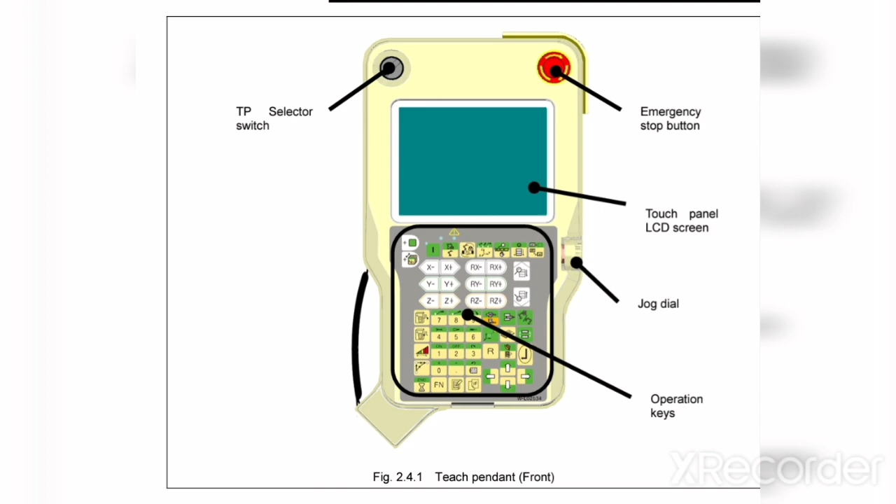Point: operation box is connected. The circuit breaker is provided on the front side of the FD11 controller, and the teach pendant and operation box are connected here as well. Circuit breaker: this turns the power of the controller on and off. Teach pendant: the teach pendant has the keys and buttons to perform teaching, file operation, various condition settings, etc.

Operation box: buttons for performing the minimum required operations such as motor power on, automatic operation start and stop, emergency stop, and switching between the teach and playback modes are provided. Fig. 2.1.1 FD11 controller operation box specifications. Circuit breaker, teach pendant, operation box. 2.1 Controller, 2-2.

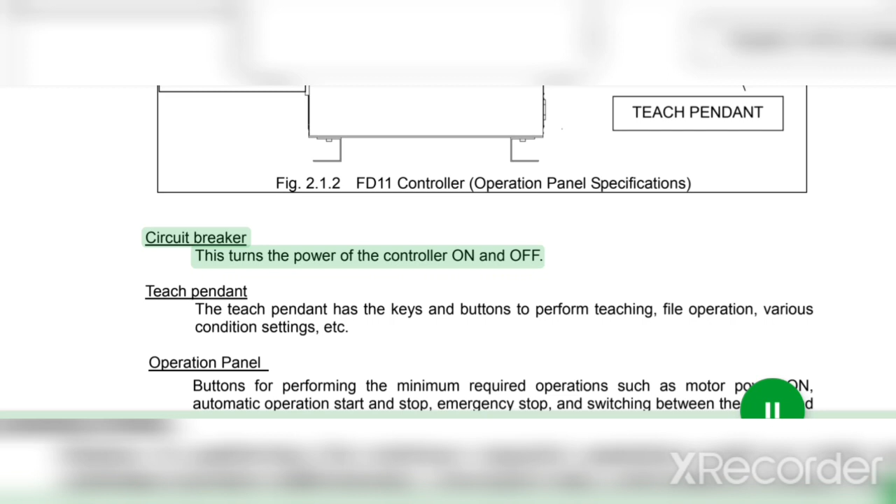2.1.2 When there is an operation panel, the circuit breaker and operation panel are provided on the front side of the FD11 controller, and the teach pendant is connected here as well. Fig. 2.1.2 FD11 controller operation panel specifications. Circuit breaker: this turns the power of the controller on and off. Teach pendant: the teach pendant has the keys and buttons to perform teaching, file operation, various condition settings, etc.

Operation panel: buttons for performing the minimum required operations such as motor power on, automatic operation start and stop, emergency stop, and switching between the teach and playback modes are provided. Operation panel, circuit breaker, teach pendant. 2.2 Operation box, 2-3.

2.2 Operation box. The operation box is provided with the minimum buttons required to exercise basic control over the robot, such as motor power on, starting and stopping automatic operation, emergency stop, and switching between modes. Table 2.2.1 Functions of buttons and switches on the operation box. Motor on button: this is used to set the motor power to on. When it is set to on, the robot is readied for operation.

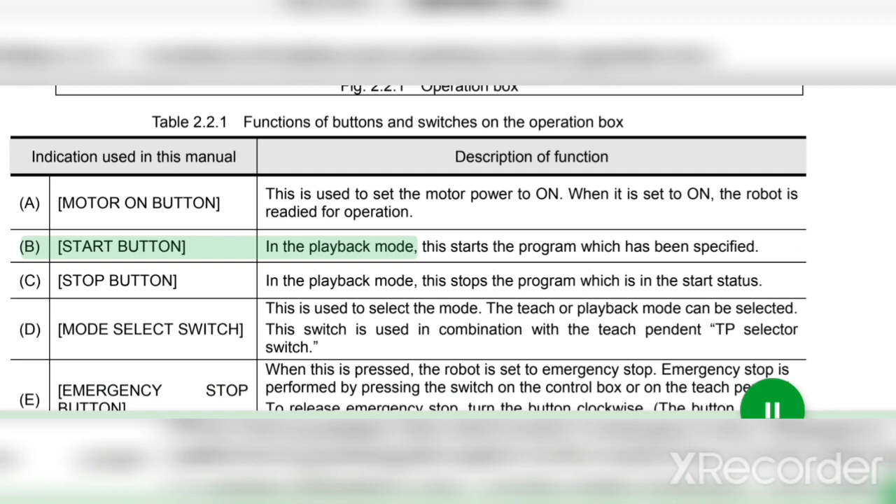Start button: in the playback mode, this starts the program which has been specified. Stop button: in the playback mode, this stops the program which is in the start status. Mode select switch: this is used to select the mode. The teach or playback mode can be selected. This switch is used in combination with the teach pendant TP selector switch.

Emergency stop button: when this is pressed, the robot is set to emergency stop. Emergency stop is performed by pressing the switch on the control box or on the teach pendant. To release emergency stop, turn the button clockwise. The button will then return to its original position. Point: when a control box is connected, an operation panel cannot be installed.

Emergency stop. Motor on. Start. Stop. Teach, playback. Fig. 2.2.1 Operation box. 2.3 Operation panel, 2-4.

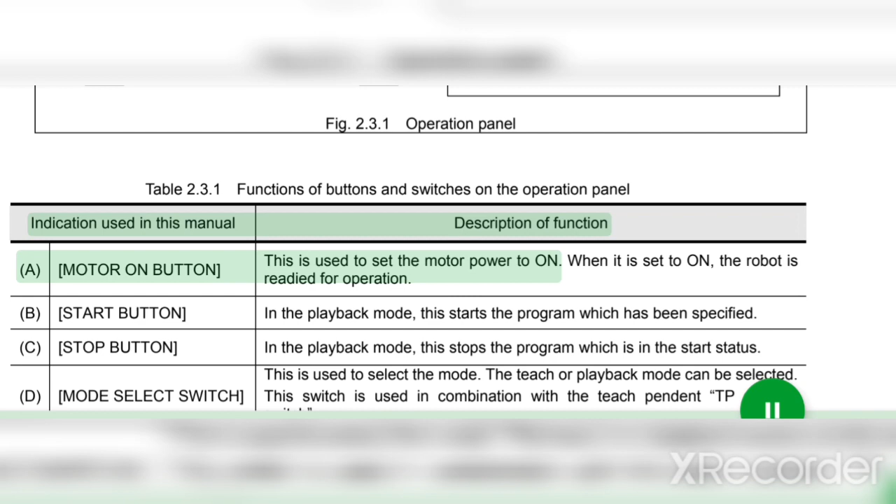2.3 Operation panel. The operation panel is provided with the minimum buttons required to exercise basic control over the robot, such as motor power on, switching between the modes, starting and stopping automatic operation, and emergency stop. Table 2.3.1 Functions of buttons and switches on the operation panel. Motor on button: this is used to set the motor power to on. When it is set to on, the robot is readied for operation.

Start button: in the playback mode, this starts the program which has been specified. Stop button: in the playback mode, this stops the program which is in the start status. Mode select switch: this is used to select the mode. The teach or playback mode can be selected. This switch is used in combination with the teach pendant TP selector switch.

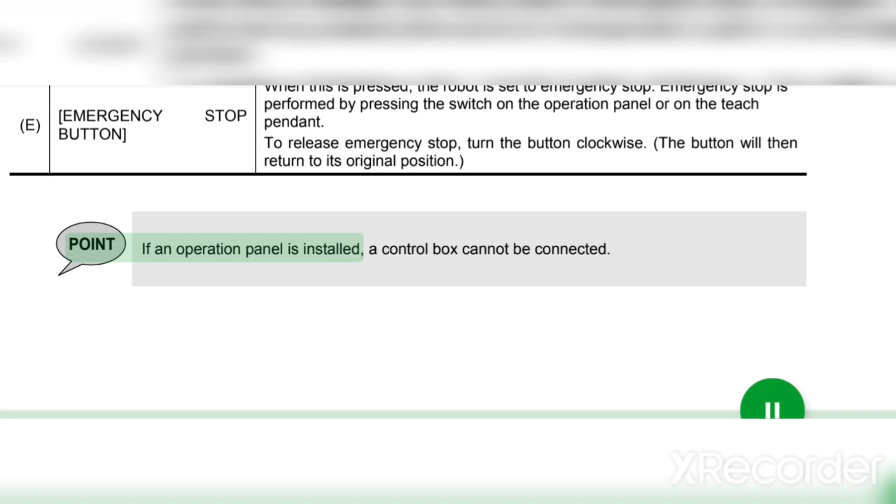Emergency stop button: when this is pressed, the robot is set to emergency stop. Emergency stop is performed by pressing the switch on the operation panel or on the teach pendant. To release emergency stop, turn the button clockwise. The button will then return to its original position. Point: if an operation panel is installed, a control box cannot be connected. Fig. 2.3.1 Operation panel. 2.4 Teach pendant, 2-5.

2.4.1 External appearance of teach pendant. The teach pendant is provided with operation keys, buttons, switches and jog dials, etc. for creating programs and performing various settings. You can allocate move commands to number keys 7-9 by pressing the enable key at the same time as a number key 7-9, and allocate often used function commands (function groups) by pressing the enable key and a number key 4-6. Functions can also be allocated to the jog dial.

Caution: be sure to follow the cautions below for the USB port. See Fig. 2.4.2. Only connect USB memory while operating files. When file operations have finished, always remove the USB memory and close the USB cap. Continuing use with the USB memory connected, or failing to close the USB cap, may hinder the dust protection, waterproofing, and anti-spatter properties, which may lead to failure.

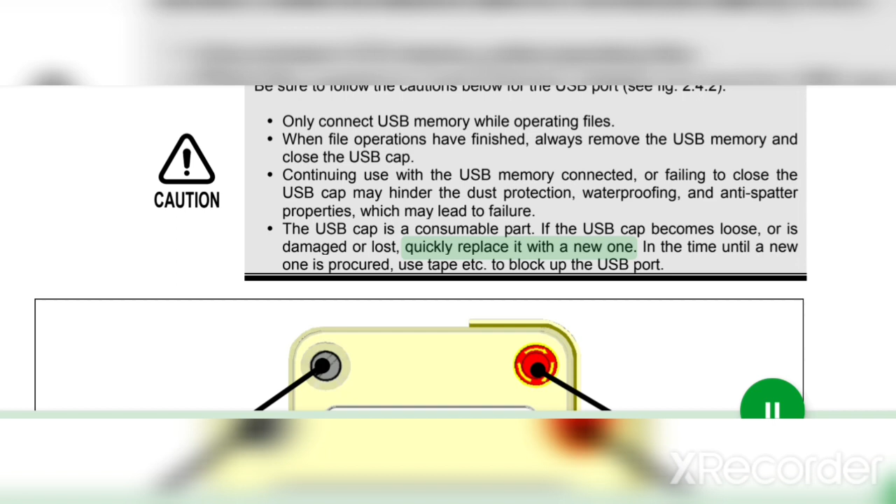The USB cap is a consumable part. If the USB cap becomes loose, or is damaged or lost, quickly replace it with a new one. In the time until a new one is procured, use tape etc. to block up the USB port.

Fig. 2.4.1 Teach pendant front. Info: The design of the operation keys shown in Fig. 2.4.1 may be slightly different to those on the actual Teach pendant. Operation keys. Jog dial. Touch panel LCD screen. Emergency stop button. TP selector switch. 2.4 Teach pendant, 2 to 6. Fig. 2.4.2 Teach pendant rear.

2.4.2 LED functions. LEDs are arranged above each Teach pendant operation key, and operate as shown below. Fig. 2.4.3 Teach pendant LED. Table 2.4.1 LED functions. LED color, functions. Green: flashes during preparation of motor power on, and lights when motor power is on (servo on). It is the same as the green motor power on button lamp on the operation panel and control box.

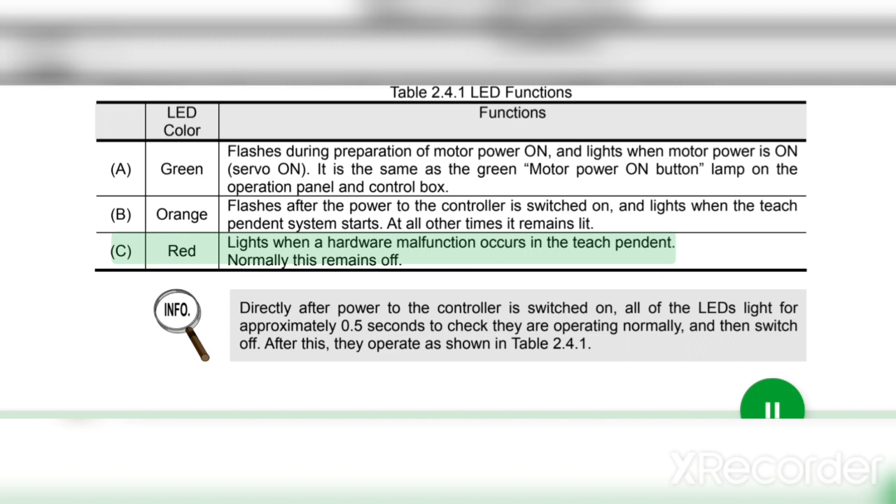Orange: flashes after the power to the controller is switched on, and lights when the Teach pendant system starts. At all other times it remains lit. Red: lights when a hardware malfunction occurs in the Teach pendant. Normally this remains off. Info: Directly after power to the controller is switched on, all of the LEDs light for approximately 0.5 seconds to check they are operating normally, and then switch off. After this, they operate as shown in Table 2.4.1.

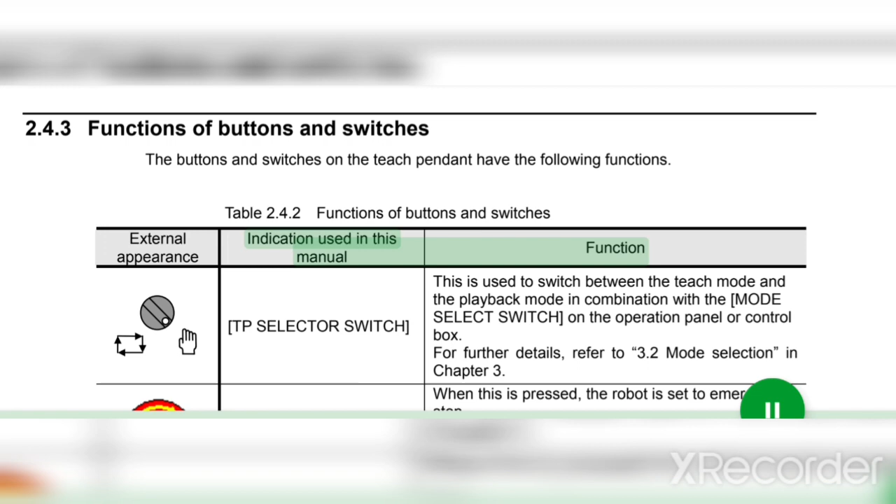USB port. Enable switch. USB cap. A, B, C. 2.4 Teach pendant, 2 to 7. 2.4.3 Functions of buttons and switches. The buttons and switches on the Teach pendant have the following functions. Table 2.4.2 Functions of buttons and switches. External appearance, indication used in this manual, function. TP selector switch: this is used to switch between the Teach mode and the playback mode in combination with the mode select switch on the operation panel or control box. For further details, refer to 3.2 Mode selection in Chapter 3.

Emergency stop button: when this is pressed, the robot is set to emergency stop. To release emergency stop, turn the button in the direction of the arrow. The button will then return to its original position. Enable switch: used to manually operate the robot in Teach mode. Normally, it is provided on the left side only. There may be two buttons, one at the left and the other at the right as an option.

When the enable switch is grasped, power is supplied to the robot (motor power on, servo on). The robot can be operated manually only while the switch is grasped. If an impending danger is sensed, either release the enable switch or grasp it tightly until a clicking sound is heard. The robot is set to emergency stop. For details on how to operate the enable switch, refer to 3.3 Turning the motor power on in Chapter 3.

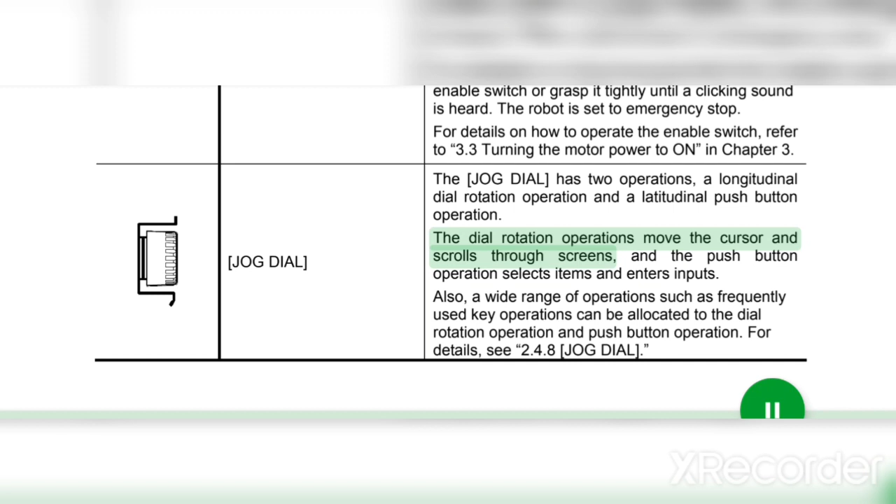Jog dial: the jog dial has two operations, a longitudinal dial rotation operation and a latitudinal push button operation. The dial rotation operations move the cursor and scroll through screens, and the push button operation selects items and enters inputs. Also, a wide range of operations, such as frequently used key operations, can be allocated to the dial rotation operation and push button operation. For details, see 2.4.8 Jog dial. 2.4 Teach pendant, 2 to 8.

2.4.4 Functions of operation keys. The operation keys provided on the Teach pendant have the following functions. Table 2.4.3 Functions of operation keys. External appearance, indication used in this manual, function. Enable: the functions are executed by pressing this key together with other keys. Also, various functions can be executed by rotating or pushing the jog dial while holding down this key.

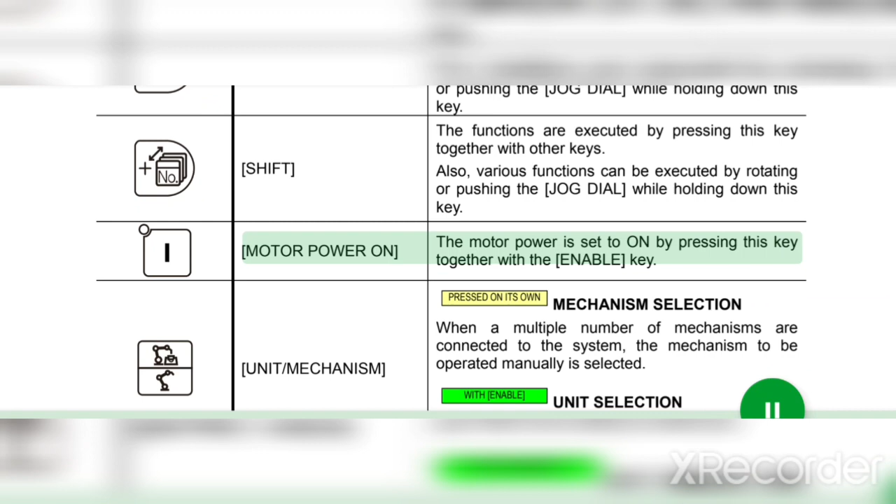Shift: the functions are executed by pressing this key together with other keys. Also, various functions can be executed by rotating or pushing the jog dial while holding down this key. Motor power on: the motor power is set to on by pressing this key together with the enable key. Mechanism selection: when a multiple number of mechanisms are connected to the system, the mechanism to be operated manually is selected.

Unit/mechanism. Unit selection: when a multiple number of units are defined in the system, the unit to be operated is selected. This key is used by a system in which a multiple number of mechanisms are connected, and it has the following functions. Synchro motion on/off: it selects or releases synchronized cooperative manual operation. Synchronize. Synchro motion on/off.

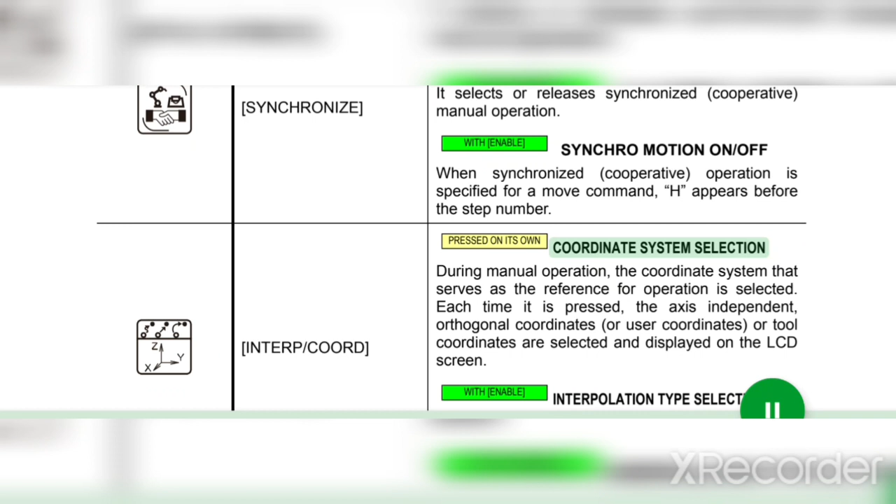When synchronized cooperative operation is specified for a move command, H appears before the step number. Coordinate system selection. During manual operation, the coordinate system that serves as the reference for operation is selected each time it is pressed. The axis-independent, orthogonal coordinates, user coordinates or tool coordinates are selected and displayed on the LCD screen. Interp/coord.

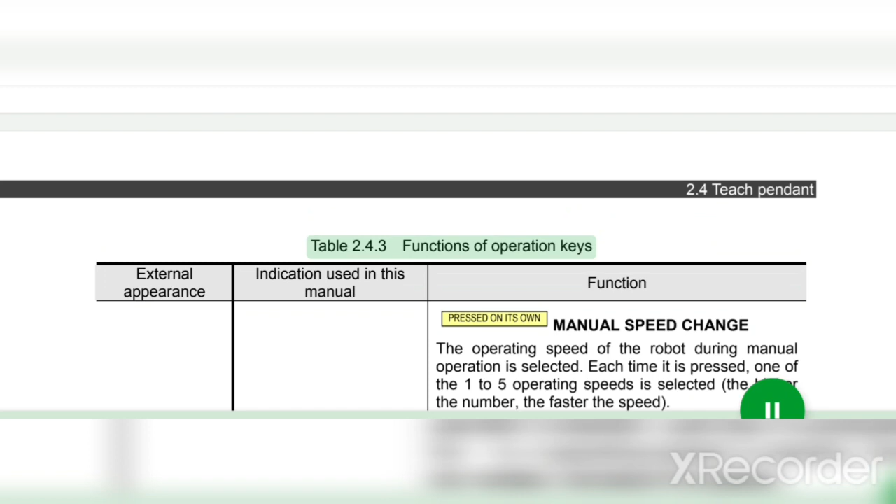Interpolation type selection. This switches the interpolation type (joint interpolation, linear interpolation or circular interpolation) of the recording status, with enable, pressed on its own. 2.4 Teach pendant, 2-9. Table 2.4.3 Functions of operation keys. External appearance. Indication used in this manual. Function.

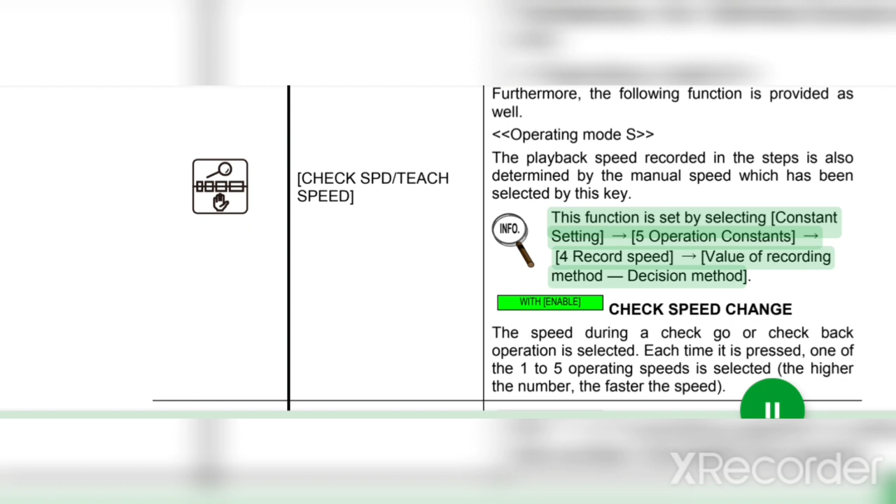Manual speed change. The operating speed of the robot during manual operation is selected each time it is pressed. One of the 1 to 5 operating speeds is selected. The higher the number, the faster the speed. Furthermore, the following function is provided as well. Operating mode S. The playback speed recorded in the steps is also determined by the manual speed which has been selected by this key. Info. This function is set by selecting constant setting, 5 operation constants, 4 Record speed value of recording method decision method. Check SPD/teach speed.

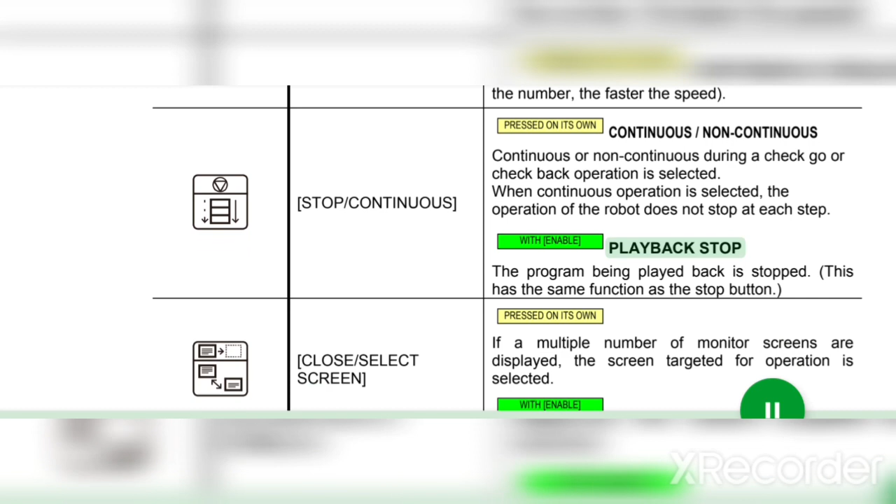Check speed change. The speed during a check go or check back operation is selected each time it is pressed. One of the 1 to 5 operating speeds is selected. The higher the number, the faster the speed. Continuous/non-continuous. Continuous or non-continuous during a check go or check back operation is selected. When continuous operation is selected, the operation of the robot does not stop at each step. Stop/continuous. Playback stop. The program being played back is stopped. This has the same function as the stop button.

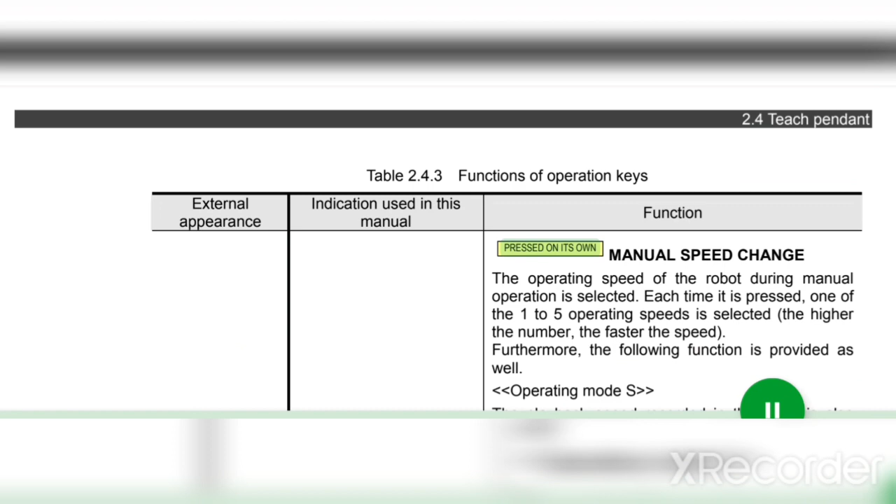If a multiple number of monitor screens are displayed, the screen targeted for operation is selected. Close/select screen. The selected monitor screen is closed. No function. Axis operating keys. Axis operation. The robot is moved manually. If an auxiliary axis is to be moved, the operation target is selected ahead of time using unit/mechanism, with enable switch, pressed on its own. 2.4 Teach pendant, 2-10. Table 2.4.3 Functions of operation keys. External appearance. Indication used in this manual. Function.

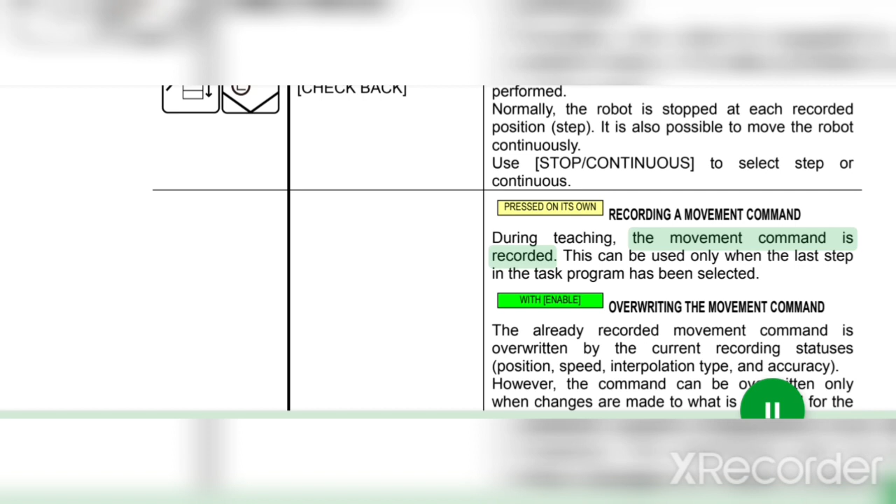No function. Check go/check back. When these are pressed together with the enable switch, the check go or check back operation is performed. Normally, the robot is stopped at each recorded position step. It is also possible to move the robot continuously. Use stop/continuous to select step or continuous. Recording a movement command. During teaching, the movement command is recorded. This can be used only when the last step in the task program has been selected.

Write/rec. Overwriting the movement command. The already recorded movement command is overwritten by the current recording status's position, speed, interpolation type, and accuracy. However, the command can be overwritten only when changes are made to what is recorded for the movement commands. A movement command cannot be overwritten by a function command. Neither can a function command be overwritten by another function command. Operating mode: the recording position of a recorded movement command can be revised using mod position.

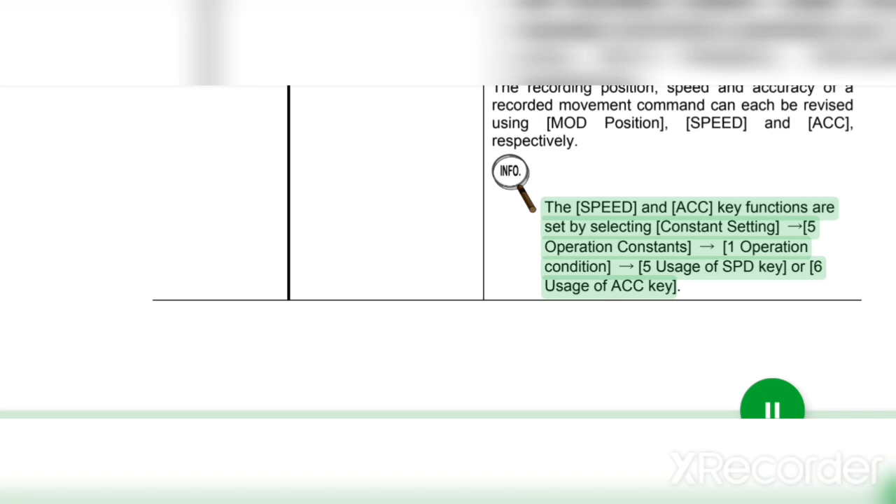Operating mode S. The recording position, speed and accuracy of a recorded movement command can each be revised using mod position, speed and acc, respectively. Info. The speed and acc key functions are set by selecting constant setting, 5 operation constants, 1 operation condition, 5 usage of SPD key or 6 usage of acc key, with enable switch, pressed on its own. 2.4 Teach pendant, 2-11. Table 2.4.3 Functions of operation keys. External appearance. Indication used in this manual. Function.

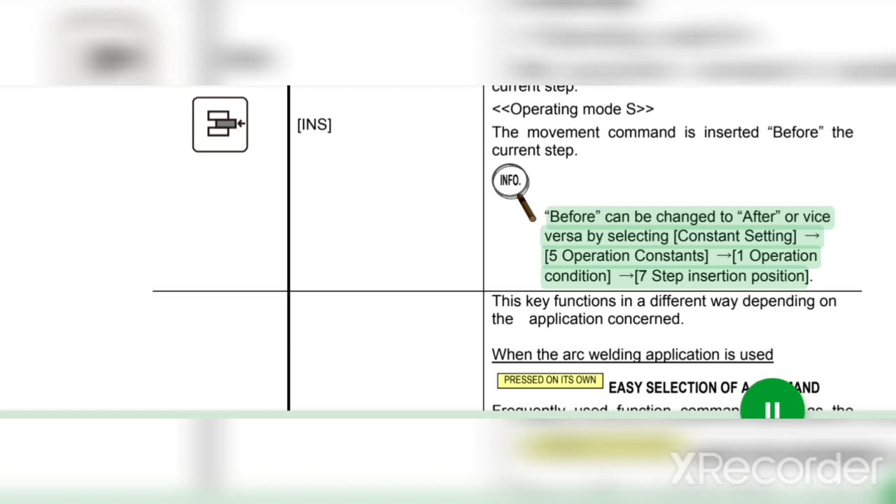No function. Insertion of a movement command. Operating mode: the movement command is inserted after the current step. Operating mode S. The movement command is inserted before the current step. Info. Before can be changed to after or vice versa by selecting constant setting, 5 operation constants, 1 operation condition, 7 step insertion position. This key functions in a different way depending on the application concerned. When the arc welding application is used, easy selection of a command. Frequently used function commands such as the movement command, welding start and stop commands and weaving commands are displayed in the F key, and can be input.

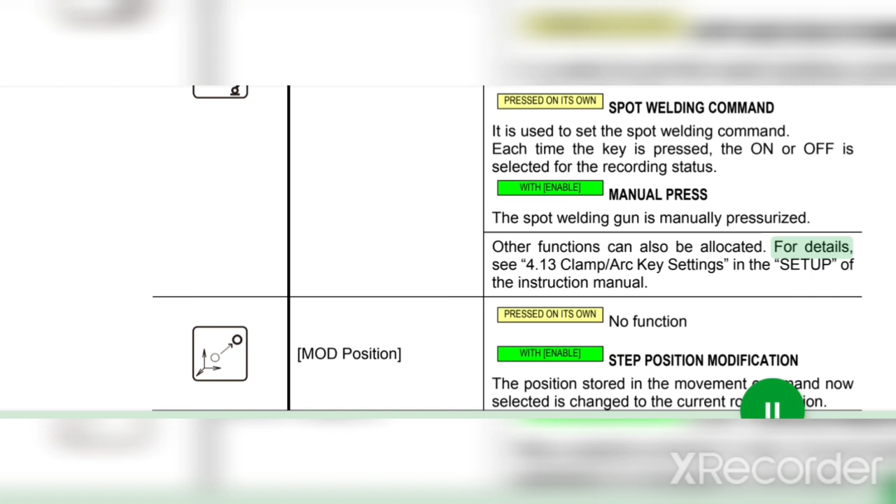No function. When the spot welding application is used, spot welding command: it is used to set the spot welding command. Each time the key is pressed, on or off is selected for the recording status. Manual press. The spot welding gun is manually pressurized. Clamp/arc. Other functions can also be allocated. For details, see 4.13 clamp/arc key settings in the setup instruction manual.

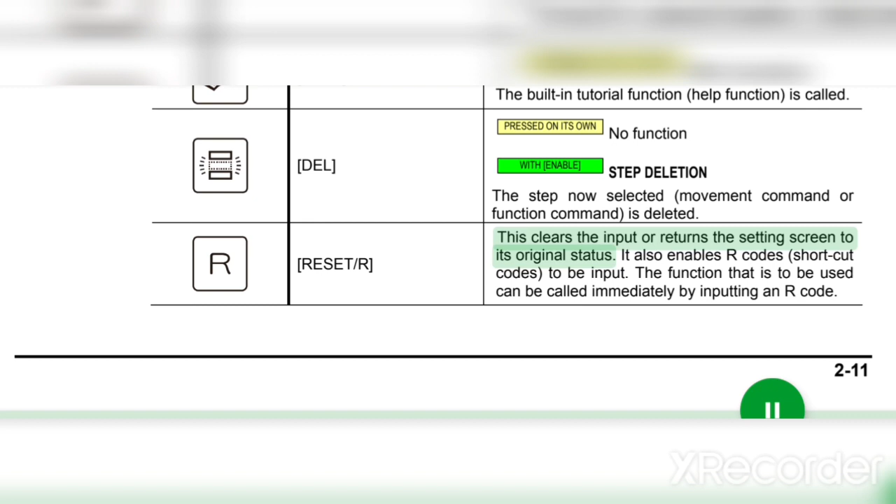No function. Mod position, step position modification. The position stored in the movement command now selected is changed to the current robot position. Help. Press this for help concerning an operation or function. The built-in tutorial help function is called. No function. Del, step deletion. The step now selected, movement command or function command, is deleted. Reset/R. This clears the input or returns the setting screen to its original status. It also enables R codes, shortcut codes, to be input.

The function that is to be used can be called immediately by inputting an R code with enable pressed on its own.

2.4 Teach pendant 2-12. Table 2.4.3 Functions of operation keys. External appearance. Indication used in this manual function. Step selection. This is used to call a step specified in the program. Prog/step. Program selection. The specified program is called. Enter. This enters the menu or numerical input contents.

Info. Determination operation of numerical input can also be performed with arrow keys by constant setting 7F-key 7, numerical input and switching to cursor under decision method of numerical input. Cursor movement. When these keys are pressed on their own, the cursor moves.

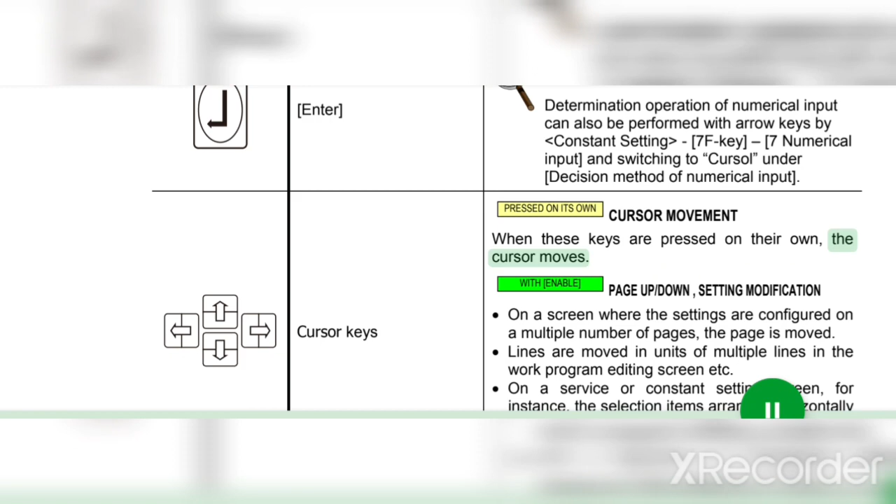Cursor keys. Page up/down. Setting modification on a screen where the settings are configured on a multiple number of pages. The page is moved. Lines are moved in units of multiple lines in the work program editing screen, etc. on a service or constant setting screen. For instance, the selection items arranged horizontally, radio buttons, are selected on a teach or playback mode screen. The number of the current step is changed.

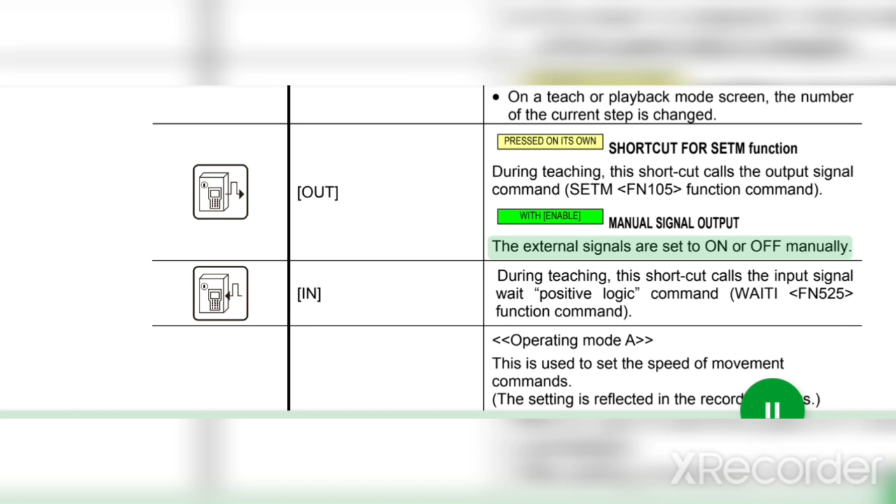Shortcut for SETM function. During teaching, this shortcut calls the output signal command SETM FN105 function command OUT. Manual signal output. The external signals are set to on or off manually. During teaching, this shortcut calls the input signal wait positive logic command WAITI FN525 function command.

SPD. Operating mode A. This is used to set the speed of movement commands. The setting is reflected in the recording status. Operating mode S. This is used to revise the speed of recorded movement commands. Info. This function is set by selecting constant setting 5 operation constants 1 operation condition 5 usage of SPD key.

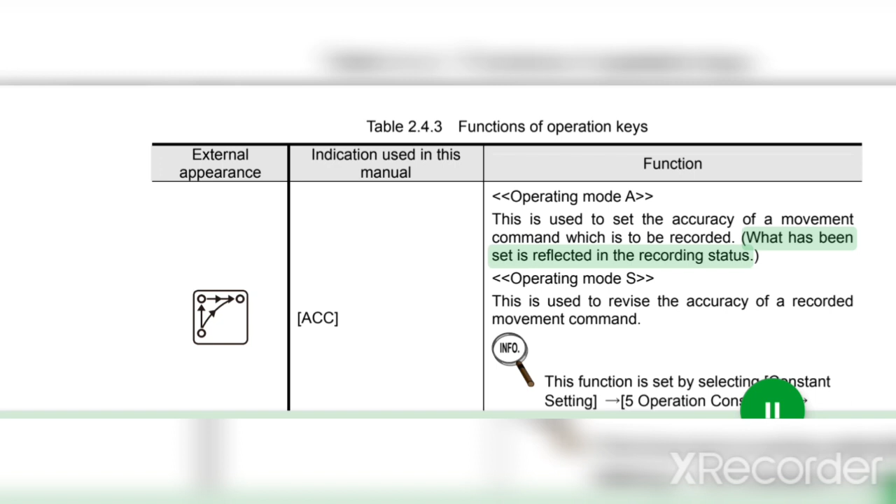2.4 Teach pendant 2-13. Table 2.4.3 Functions of operation keys. External appearance. Indication used in this manual function. ACC. Operating mode A. This is used to set the accuracy of a movement command which is to be recorded. What has been set is reflected in the recording status. Operating mode S. This is used to revise the accuracy of a recorded movement command. Info. This function is set by selecting constant setting 5 operation constants 1 operation condition 6 usage of ACC key.

Shortcut for delay function. During teaching, this shortcut records the timer command DELAY FN50 function command. End/timer. Shortcut for end function. During teaching, this shortcut records the end command END FN92 function command with enable pressed on its own. 2.4 Teach pendant 2-14.

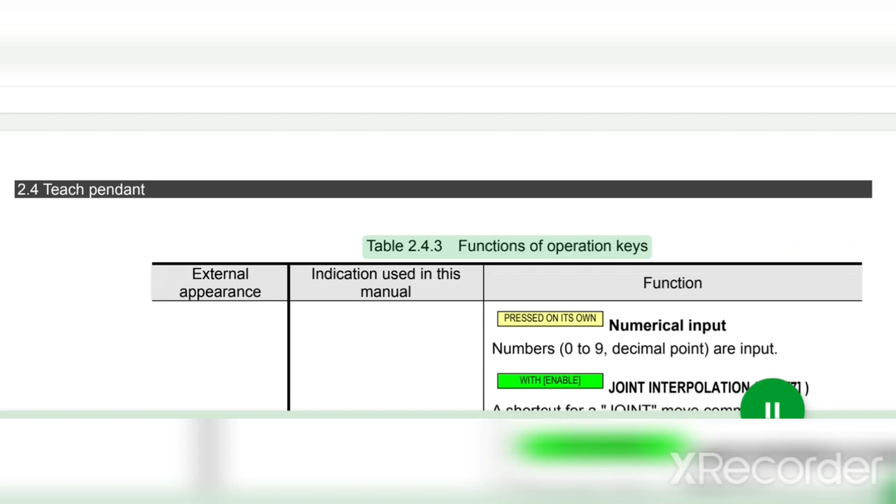Table 2.4.3 Functions of operation keys. External appearance. Indication used in this manual function. Numerical input. Numbers 0 to 9 and decimal point are input. Joint interpolation with 7. A shortcut for a joint move command. Linear interpolation with 8. A shortcut for a LIN move command. Circular interpolation with 9. A shortcut for a CIR move command.

For arc welding uses. Application function 1 with 4. During teaching, commands for arc welding are displayed on the F keys F1 to F12. Application function 2 with 5. During teaching, commands for weaving are displayed on the F keys F1 to F12. Application function 3 with 6. During teaching, commands for sensors are displayed on the F keys F1 to F12.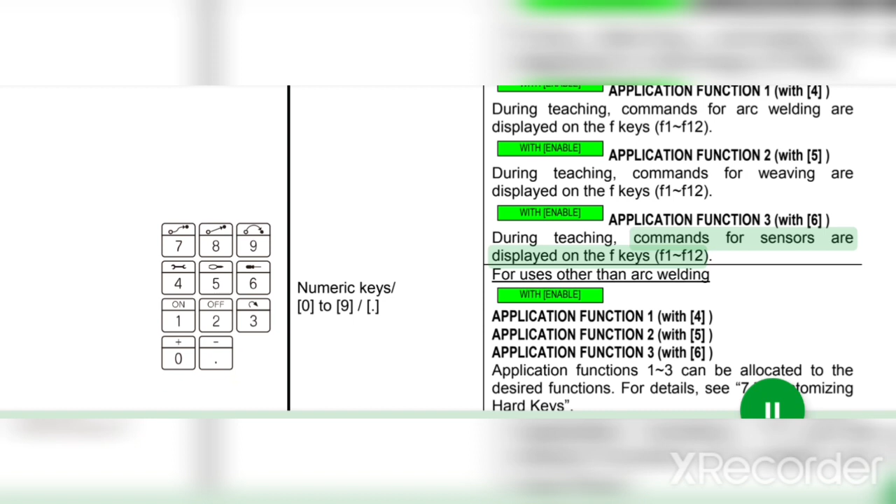For uses other than arc welding, application function 1 with 4, application function 2 with 5, application function 3 with 6, application functions 1-3 can be allocated to the desired functions. For details, see 7.7 Customizing hard keys. On with 1, on a setting screen. For instance, a check mark is placed inside the checkbox. Off with 2, on a setting screen. For instance, the check mark inside the checkbox is removed.

Redo with 3. This redoes the operation which was restored by clearing, undo, the operation immediately before. It is effective only while creating a new or editing an existing program. Plus with 0. Plus is input. Numeric keys 0 to 9. Minus with. Minus is input.

With enable. With enable. With enable. With enable. Pressed on its own.

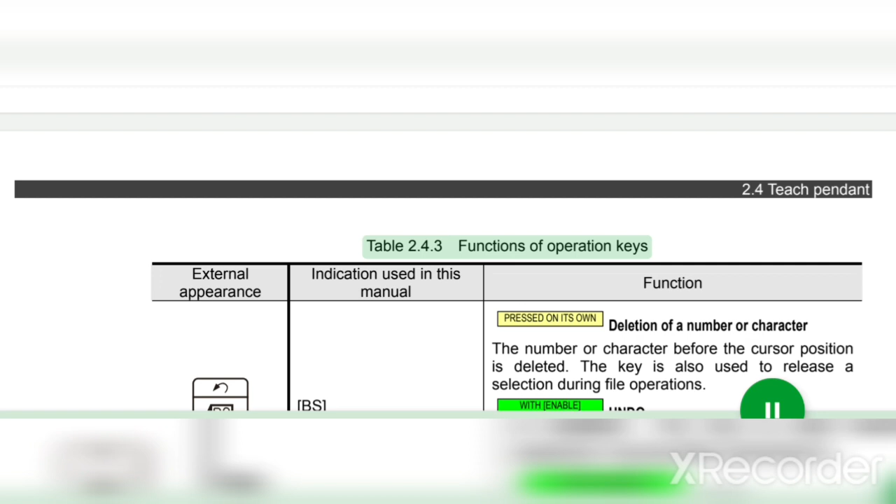2.4 Teach pendant 2-15. Table 2.4.3 Functions of operation keys. External appearance. Indication used in this manual function. Deletion of a number or character. The number or character before the cursor position is deleted. The key is also used to release a selection during file operations.

BS undo. The operation performed immediately before is cleared, and the status prior to the change is restored. It is effective only while creating a new or editing an existing program. FN function. This is used when selecting the function commands. Edit. Opens the program editing screen.

In the program editing screen, mainly function commands are changed, added or deleted, and the parameters of move commands are changed. I/F (interface) opens the interface panel window with Enable pressed on its own. 2.4 Teach pendant, 2-16. 2.4.5 Configuration of display screen.

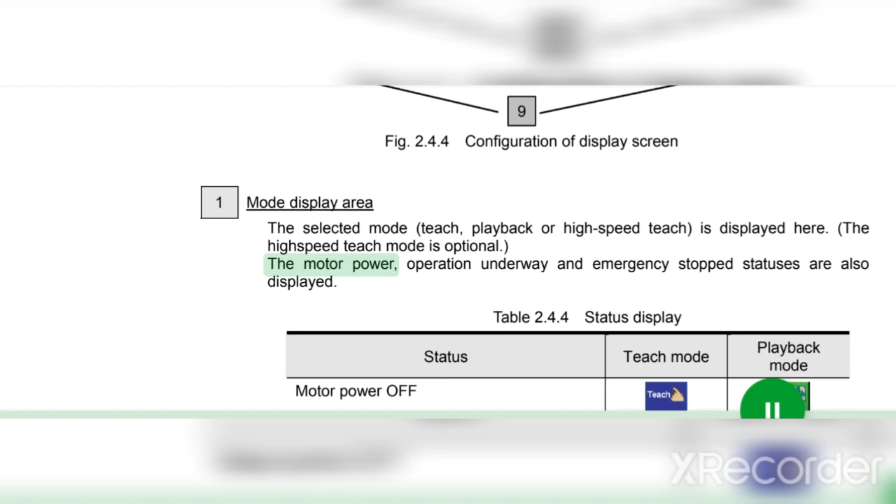Indicated on the display screens are the program and settings used for the current operation, and the icons (F keys) for selecting the various functions. Fig. 2.4.4 Configuration of display screen. 1. Mode display area. The selected mode, teach, playback or high-speed teach, is displayed here. The high-speed teach mode is optional. The motor power, operation underway and emergency stopped statuses are also displayed.

Table 2.4.4 Status display. Status: teach mode, playback mode. Motor power off. Motor power on, servo power off. Now saving energy. Motor power on, servo power on, motors energized. Check go/back operation underway. Now operating. Emergency stopped. 2. Program number display area. The number of the selected program is displayed.

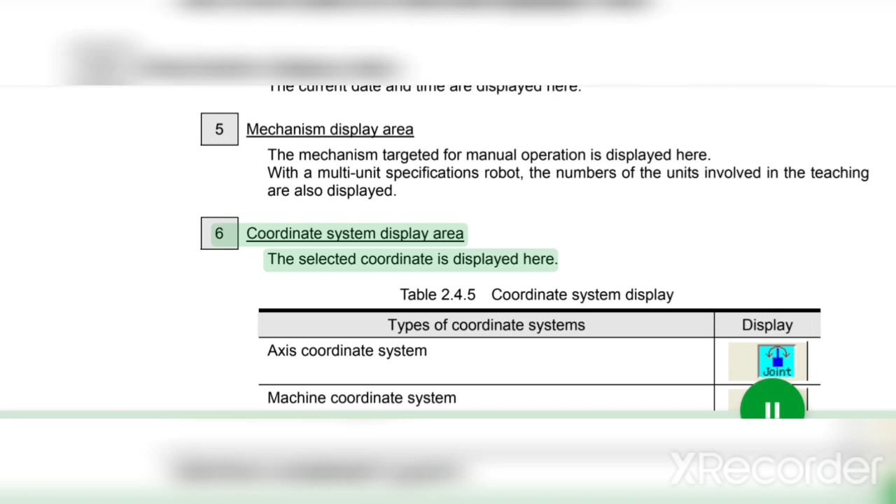2.4 Teach pendant, 2-17. 3. Step number display area. The number of the step selected in the program is displayed here. The total number of steps is displayed under the step number. 4. Date and time display area. The current date and time are displayed here. 5. Mechanism display area. The mechanism targeted for manual operation is displayed here. With a multi-unit specifications robot, the numbers of the units involved in the teaching are also displayed. 6. Coordinate system display area. The selected coordinate is displayed here.

Table 2.4.5 Coordinate system display. Types of coordinate systems: axis coordinate system, machine coordinate system, tool coordinate system (the number on the left of the icon is the tool number), work coordinate system, absolute coordinate system, world coordinate system, cylindrical coordinate system, user coordinate system (the number on the left of the icon is the coordinate number), welding line coordinate system.

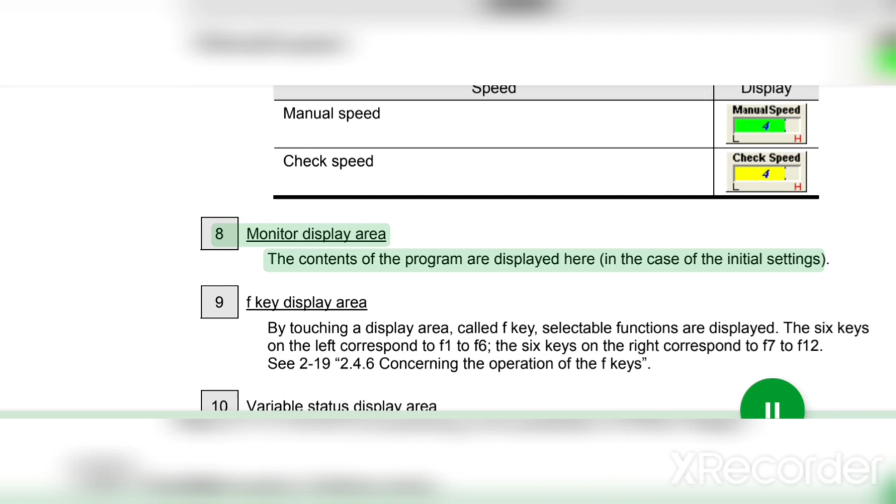7. Speed display area. The manual operation speed is displayed here. When Enable is pressed, the check speed is displayed. Table 2.4.6 Speed display: manual speed, check speed. 8. Monitor display area. The contents of the program are displayed here in the case of the initial settings. 9. F key display area. By touching a display area, called F key, selectable functions are displayed. The 6 keys on the left correspond to F1 to F6. The 6 keys on the right correspond to F7 to F12. See 2-19, 2.4.6 Concerning the operation of the F keys.

10. Variable status display area. Various status displays, such as input wait (I wait) and external start selected, appear as the icons shown in Table 2.4.7 in this area. When this status ends, the icon is cleared. 2.4 Teach pendant, 2-18. Table 2.4.7 Status icon display. Not all of the optional functions are listed in the above table. For details on any of the icons not described in the table, refer to the operating instructions for the optional functions concerned.

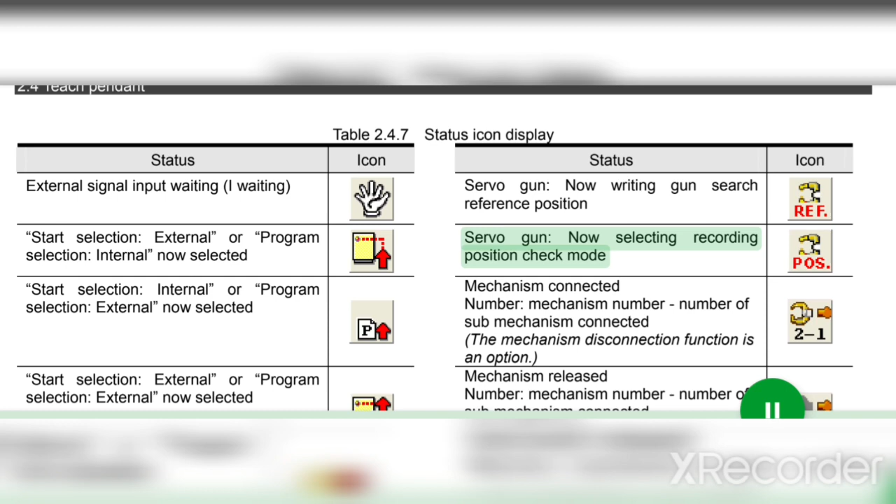External signal input waiting (I waiting). Servo gun now writing gun search reference position. Start selection: external or program selection, internal now selected. Servo gun now selecting recording position. Check mode. Start selection: internal or program selection, external now selected. Mechanism connected number: mechanism number, number of sub-mechanism connected. The mechanism disconnection function is an option.

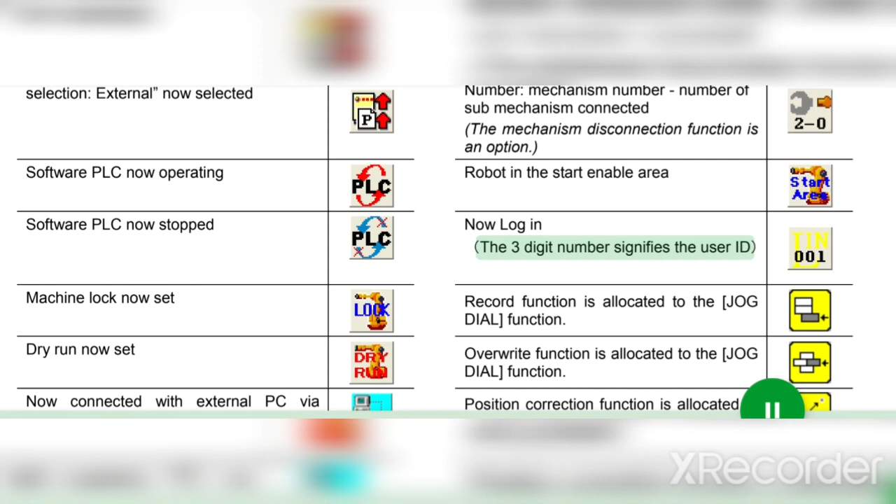Start selection: external or program selection, external now selected. Mechanism release number: mechanism number of sub-mechanism connected. The mechanism disconnection function is an option. Software PLC now operating. Robot in the start enable area. Software PLC now stopped. Now logged in; the 3-digit number signifies the user ID. Machine lock now set. Record function is allocated to the jog dial function. Dry run now set.

Overwrite function is allocated to the jog dial function. Now connected with external PC via Ethernet. Position correction function is allocated to the jog dial function. Automatic backup proceeding; the extent to which the operation has been completed is indicated as a percentage. Interpolation classification switching function is allocated to the jog dial function. Temporarily stopped with station startup only. Coordinate switching function is allocated to the jog dial function.

Holding or now paused: this is displayed only when the hold signal or pause signal is input during playback. Insertion function is allocated to the jog dial function. Mechanism now disconnected. Tool fine adjustment function is allocated to the jog dial function. I/O simulation mode now selected. Weld wire inching/retracting function is allocated to the jog dial function. J5 axis and singular point status. The touch panel is locked. 2.4 Teach pendant, 2-19.

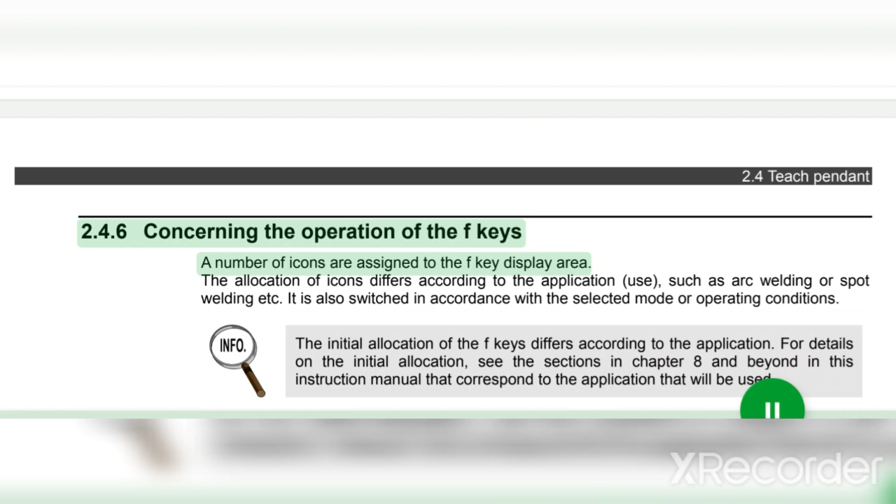2.4.6 Concerning the operation of the F keys. A number of icons are assigned to the F key display area. The allocation of icons differs according to the application use, such as arc welding or spot welding, etc.

It is also switched in accordance with the selected mode or operating conditions. Info. The initial allocation of the F keys differs according to the application. For details on the initial allocation, see the sections in Chapter 8 and beyond in this instruction manual that correspond to the application that will be used.

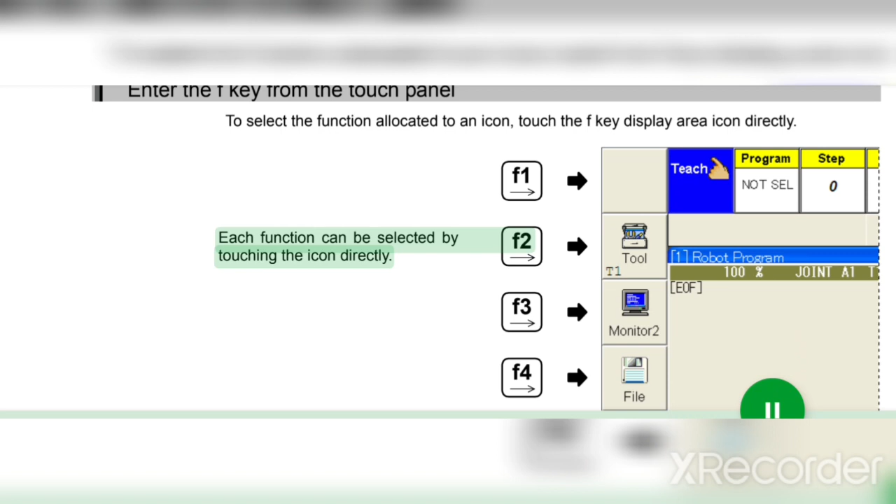Enter the F key from the touch panel to select the function allocated to an icon. Touch the F key display area icon directly. Each function (F1, F2, F3, F4, F5, F6) can be selected by touching the icon directly. Normally, a function is selected by pressing one of the F1 to F12 icons on its own.

However, in some cases the key must be pressed together with Enable. An icon displayed with the mesh display can be selected by pressing Enable. When Enable is pressed, the display changes. Some icons are only displayed when Enable is pressed. 2.4 Teach pendant, 2-20.

Enter the F key from the operation keys, inputting using only the F keys, without using the touch panel. This is known as F key substitute operation. There are two types of operating method. See Table 2.4.8. In the default settings, F key substitute operation is disabled: no key input method.

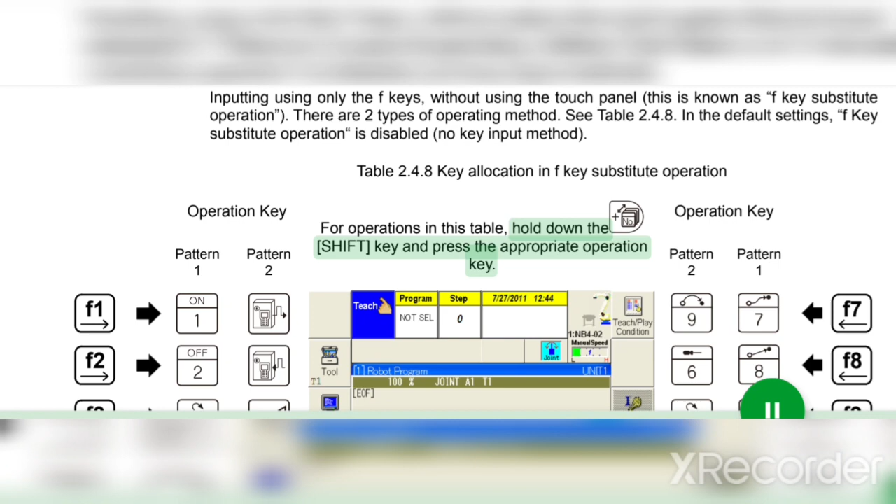Table 2.4.8, key allocation in F key substitute operation. Operation key, pattern 1, pattern 2. For operations in this table, hold down the shift key and press the appropriate operation key. Pattern 2, pattern 1, F1, F7, F2, F8, F3, F9, F4, F10, F5, F11, F6, F12.

The description below shows how to enable F key substitute operation. 1. Change the operator qualification to expert or higher. 2. Select constant setting, 7 F keys, 9 alternative F key operation. 3. Hold down Enable and press left/right to select the item. Correspondences between the F keys and operation keys for each setting are shown in Table 2.4.8. 4. After selecting the item, press F12 complete. This completes the settings. 2.4 Teach pendant, 2-21.

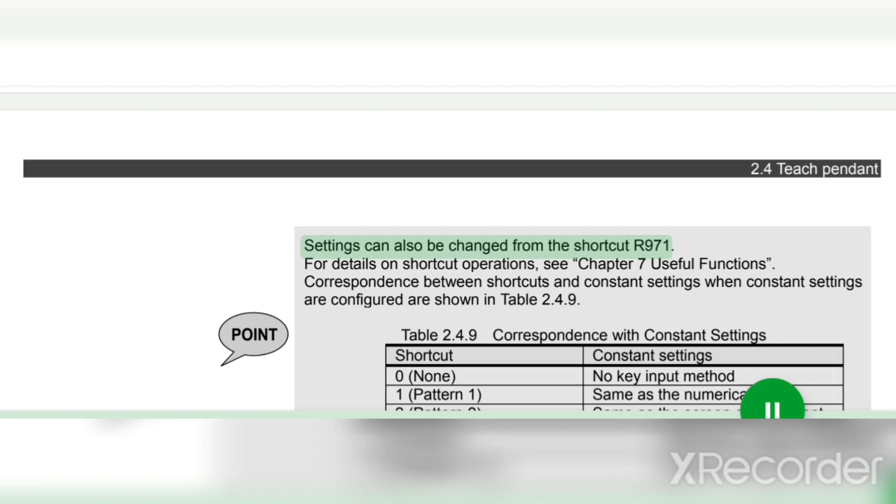Point. Settings can also be changed from the shortcut R971. For details on shortcut operations, see Chapter 7 Useful Functions. Correspondence between shortcuts and constant settings is shown in Table 2.4.9. Table 2.4.9, correspondence with constant settings. Shortcut, constant settings: 0, none, no key input method; 1, pattern 1, same as the numerical figure; 2, pattern 2, same as the screen arrangement.

2.4.7 Touch panel. The touch panel is equipped as standard to the teach pendant, and is set to be operable by default. Operations using the touch panel can be enabled or disabled by changing the setting. The touch panel can be set to temporarily lock and be inoperable, even when enabled, if the teach pendant is not operated for a set period of time. This is called the touch panel lock function, and prevents unwanted entries caused by unintentional touching of the touch panel. The touch panel lock function is enabled by default.

Point. The icon shown below is displayed in the status icon display if the touch panel is locked by the touch panel lock function. The following message is displayed if the touch panel is touched. In this case, the touch panel is automatically unlocked if the operation keys or jog dial are used. This section explains how to change the touch panel settings. 2.4 Teach Pendant, 2-22. Changing the touch panel settings.

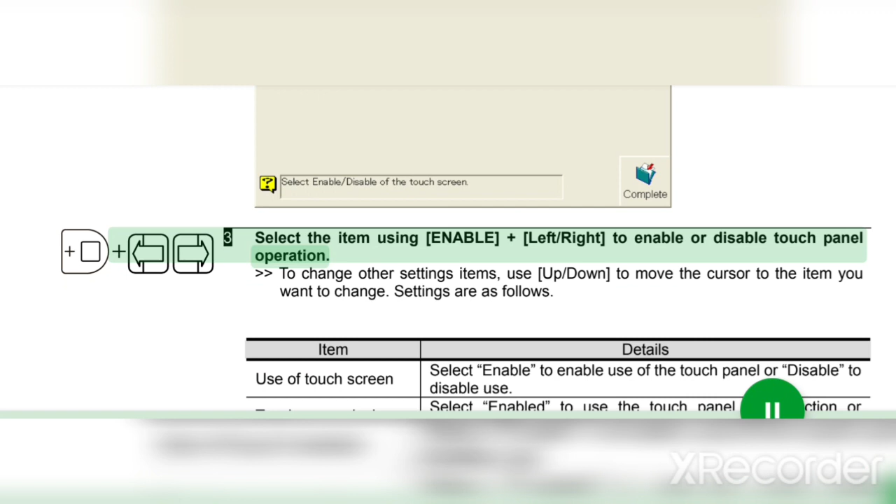1. Change the operator qualification to expert or higher. 2. Select constant setting, 7 F keys, 10 touch screen. The following setting screen is displayed. 3. Select the item using Enable plus left/right to enable or disable touch panel operation. To change other setting items, use up/down to move the cursor to the item you want to change. Settings are as follows. Item details.

Use of touch screen: select enable to enable use of the touch panel or disable to disable use. Touch screen lock: select enabled to use the touch panel lock function or disabled not to use it. Non-operate time: set the period of non-use after which the touch panel is locked. Warning at touch op: select enable to display a message if the touch panel is touched while locked. Select disabled not to display this message.

Important. Touch panel operation cannot be disabled if the method of alternative key input of F key in constant setting, 7 F keys, 9 alternative F key operation is set to method of inputting key none. 4. After selecting the item, press F12 complete. This completes the settings. Point. The touch panel can also be enabled/disabled from the shortcut R970. For details on shortcut operations, see Chapter 7 Useful Functions. 2.4 Teach Pendant, 2-23.

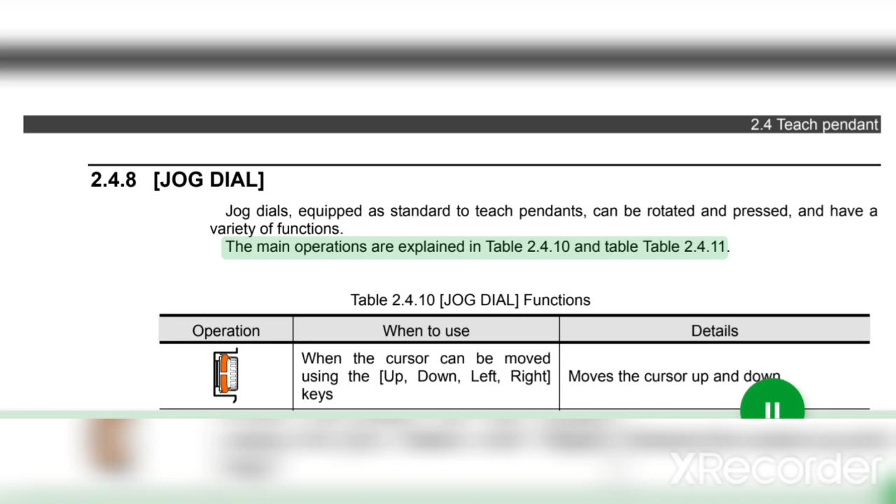2.4.8 Jog dial. Jog dials, equipped as standard to teach pendants, can be rotated and pressed, and have a variety of functions. The main operations are explained in Table 2.4.10 and Table 2.4.11. Table 2.4.10, jog dial functions.

Operation. When to use. Details. When the cursor can be moved using the up, down, left, right keys: moves the cursor up and down. When selecting the robot program monitor: moves the current step. When the page can be turned using F key plus: turns the page. In arc monitor editing mode during arc welding, when changing online: slowly increases and decreases each weld condition value.

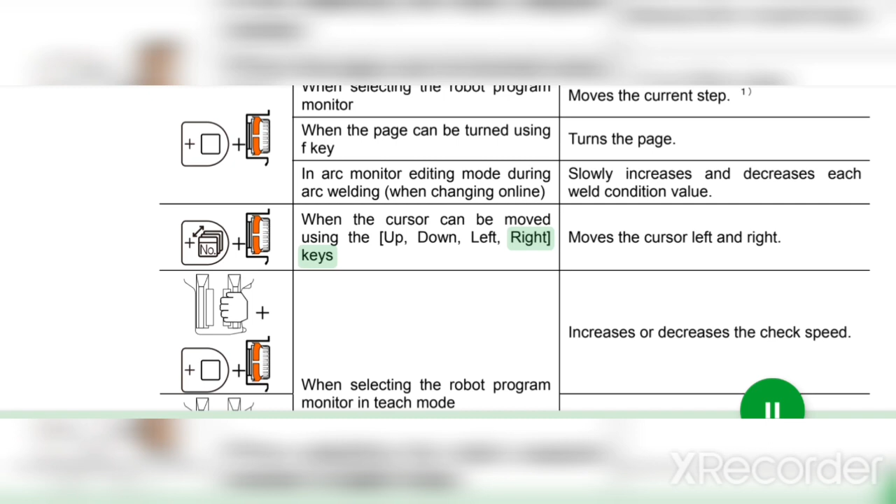Plus, when the cursor can be moved using the up, down, left, right keys: moves the cursor left and right. Plus increases or decreases the check speed. Plus, when selecting the robot program monitor in teach mode: increases or decreases the manual speed. When selecting the robot program monitor, mechanism can be switched.

When the Enter key can be used to select items: selects items. When selecting the robot program monitor, unit can be switched. Plus, when F12 key can be used to enter, execute and write values: enters, executes, and writes values.

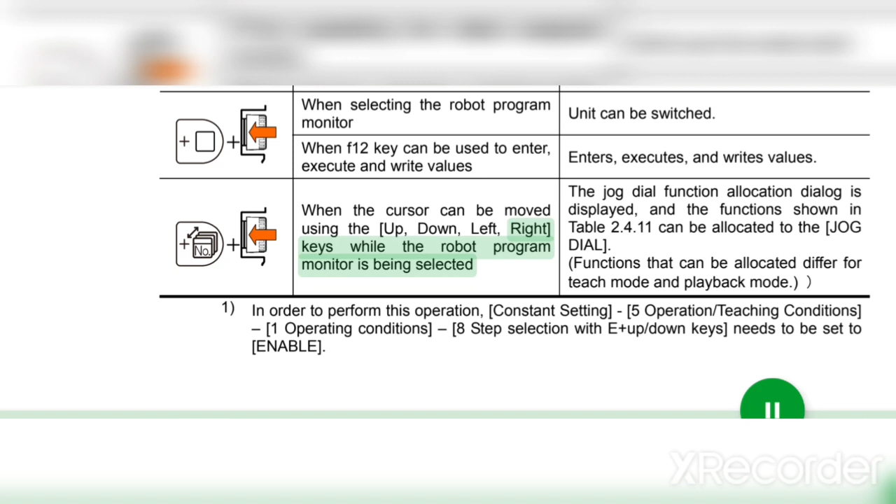Plus, when the cursor can be moved using the up, down, left, right keys while the robot program monitor is being selected: the jog dial function allocation dialog is displayed, and the functions shown in Table 2.4.11 can be allocated to the jog dial. Functions that can be allocated differ for teach mode and playback mode. In order to perform this operation, constant setting 5 Operations/teaching conditions, 1 Operating conditions, 8 Step selection with E+up/down keys needs to be set to enable.

2.4 Teach Pendant, 2-24. Table 2.4.11 Jog dial functions. When allocating functions: function, allocation status, operation, when to use, details. Executes the record, overwrites, adjusts the position. Interpolation can be switched. Coordinates can be switched. When selecting the robot program monitor in teach mode, inserts the record. Plus, when selecting the robot program monitor in teach mode, robot can be moved.

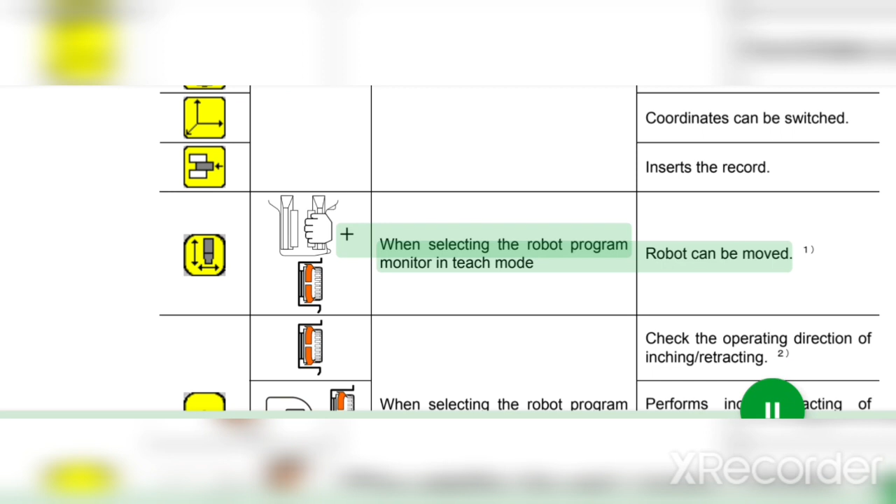Check the operating direction of inching/retracting. Plus performs inching/retracting of the arc weld wire. Plus, when selecting the robot program monitor, performs inching/retract of the arc weld wire. For details, see 3.4.3 Moving the robot with the jog dial. For details, see Chapter 8 Basic operations for arc welding. Point: the only function that can be allocated in playback mode is wire inching/retracting.

Allocating functions to jog dial operations. Frequently used operations, such as recording or overwriting, can be allocated to the jog dial push button operation, and functions such as manual operation can be allocated to the jog dial rotation operation. This section explains how to allocate operations. Operations are allocated when the robot program monitor is in the selected state. 2.4 Teach Pendant, 2-25.

1. When the robot program monitor is selected in teach mode, hold down Shift and press the jog dial. A jog dial function allocation dialog, such as the one shown below, is displayed. Rotate the jog dial to select the desired icon from record / overwrite / position correction / interpolation / coordinates / insert / manual operation, and either press the push button or touch the icon. The selected function is allocated, and the icon is displayed in the variable status display area.

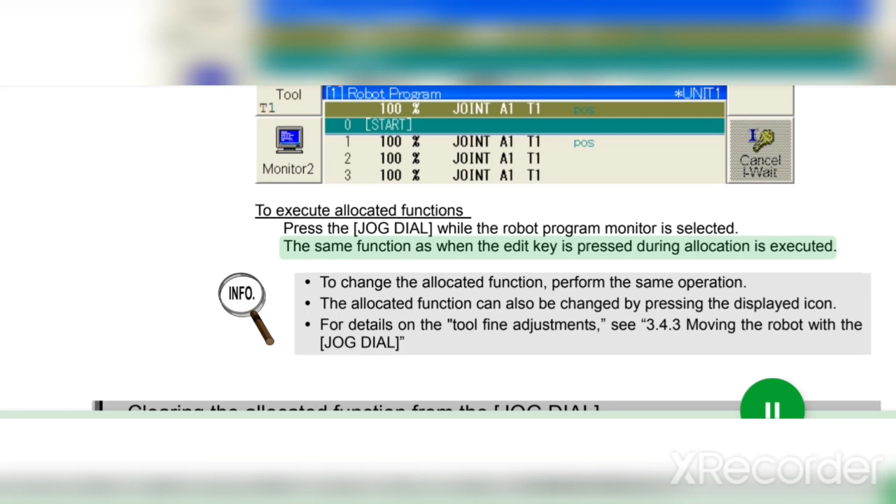To execute allocated functions, press the jog dial while the robot program monitor is selected. The same function as when the edit key is pressed during allocation is executed. Info: to change the allocated function, perform the same operation. The allocated function can also be changed by pressing the displayed icon. For details on the tool fine adjustments, see 3.4.3 Moving the robot with the jog dial.

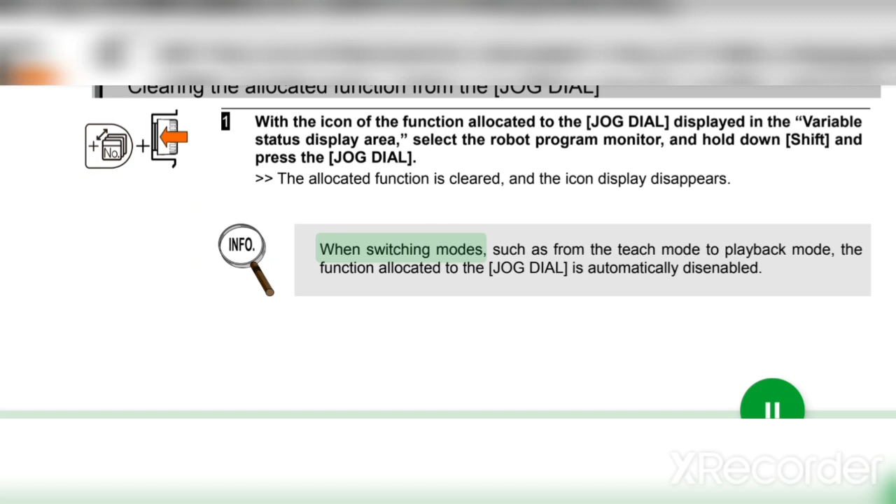Clearing the allocated function from the jog dial. 1. With the icon of the function allocated to the jog dial displayed in the variable status display area, select the robot program monitor, and hold down Shift and press the jog dial. The allocated function is cleared, and the icon display disappears. Info: when switching modes, such as from teach mode to playback mode, the function allocated to the jog dial is automatically disabled.

2-26. 2.5 To input characters. The method used to input characters is described here. Functions of soft keyboard. 1. When the status in which characters can be input is established, the soft keyboard starts up. Select characters using one of the following methods: select the characters using the up, down, left and right keys, and press Enter or F11 Enter, or touch the characters that you want to enter on the screen.

To move the cursor in the character input field, press the left or right key while holding down Enable. To input a space, press F4 or F10 Blank. To delete a character, move the cursor to the right of the character to be deleted, and press F5 BS. The character to the left of the cursor is now deleted. 2. To record the characters which have been input, press F12 Complete.

The characters are recorded, and operation returns to the original screen. 2.5 To input characters, 2-27. To input letters of the alphabet or symbols: 1. Alphanumerics and half-size symbols can be input in the initial start status of the soft keyboard. 2. Input the characters by following the steps on the previous page. 2.5 To input characters, 2-28.

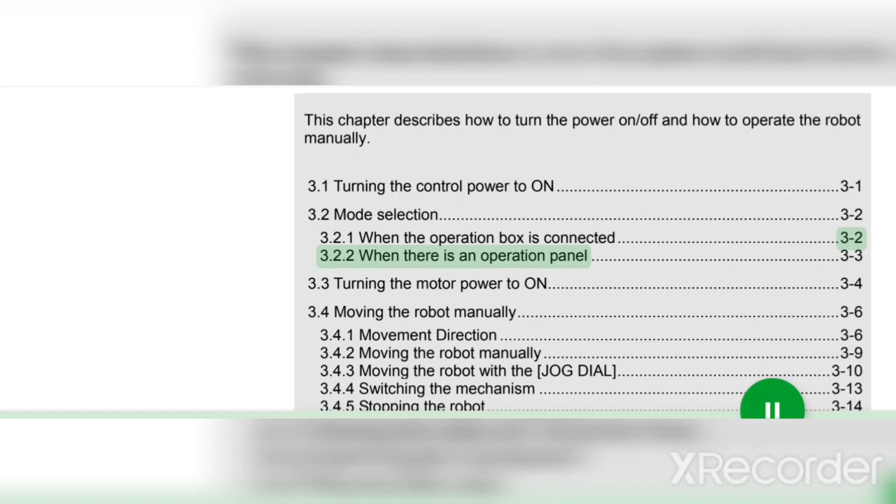Note. Chapter 3: Turning the power on/off and manual operation. This chapter describes how to turn the power on/off and how to operate the robot manually. 3.1 Turning the control power to on, 3-1. 3.2 Mode selection, 3-2. 3.2.1 When the operation box is connected, 3-2. 3.2.2 When there is an operation panel, 3-3. 3.3 Turning the motor power to on, 3-4.

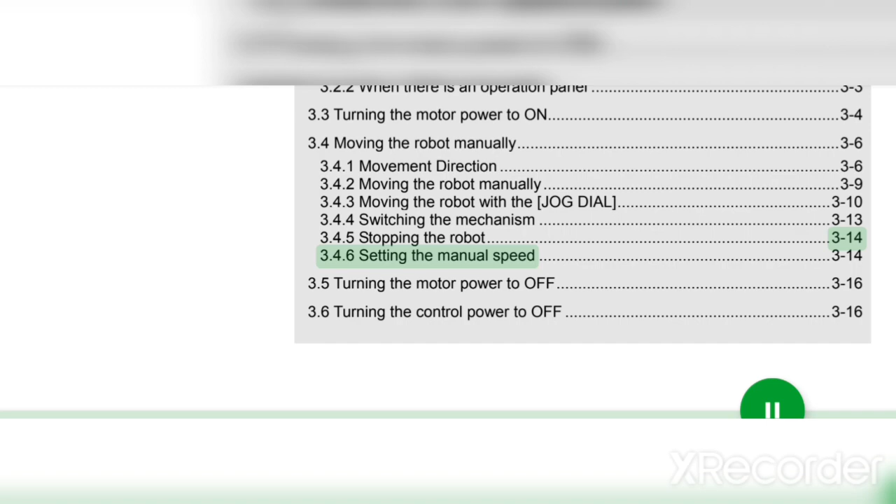3.4 Moving the robot manually, 3-6. 3.4.1 Movement direction, 3-6. 3.4.2 Moving the robot manually, 3-9. 3.4.3 Moving the robot with the jog dial, 3-10. 3.4.4 Switching the mechanism, 3-13. 3.4.5 Stopping the robot, 3-14. 3.4.6 Setting the manual speed, 3-14. 3.5 Turning the motor power to off, 3-16. 3.6 Turning the control power to off, 3-16. This is a dummy page.

Do not erase. 3.1 Turning the control power to on, 3-1. In order to use the robot, first turn the controller's control power to on. Danger: before turning on the control power, the controller's door must be closed without fail. Receiving an electric shock from touching any of the power supply areas may result in death or serious injury. Turning the control power to on.

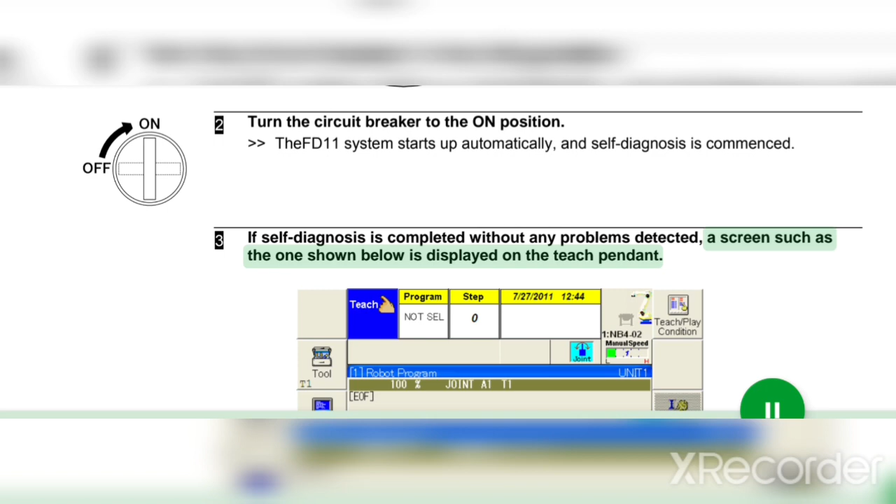1. First, check the position of the circuit breaker power switch. This position differs depending on the series and the specifications. Breaker. 2. Turn the circuit breaker to the on position. The system starts up automatically, and self-diagnosis is commenced. 3. If self-diagnosis is completed without any problems detected, a screen such as the one shown below is displayed on the teach pendant. The robot is now ready to operate.

3.2 Mode selection, 3-2. The controller features a teach mode that is mainly used for creating programs, and a playback mode that is for automatically running programs. 3.2.1 When the operation box is connected, the mode is selected using the mode select switch on the operation box. 1. The mode can be checked on the teach pendant display. Teach, playback. 2. Rotate the mode select switch on the operation box to either the teach side or playback side. The mode switches to the selected mode.

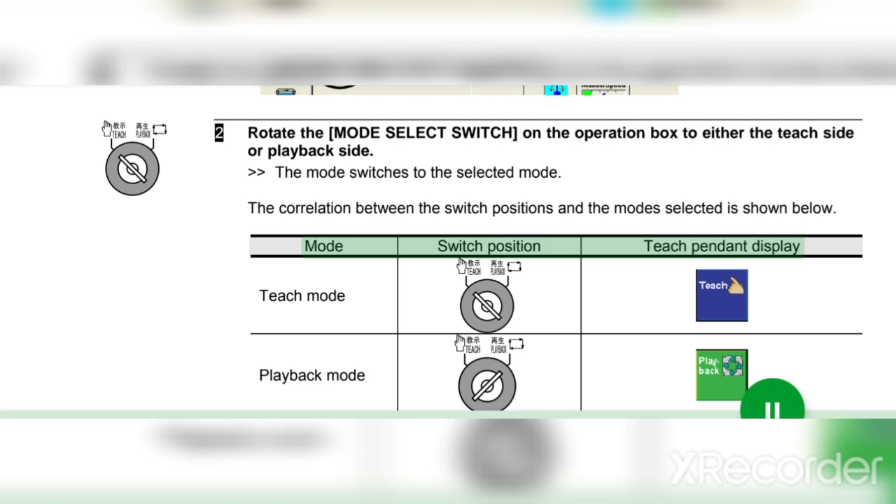The correlation between the switch positions and the modes selected is shown below: mode switch position, teach pendant display, teach mode, playback mode. In this state, the robot cannot be operated manually or automatically. Continue with the following operations. 3. Turn the TP selector switch on the teach pendant to the teach or playback position so that the operation panel and teach pendant are both set to the same mode. When one of the following combinations is used, the robot can be operated manually or automatically: mode, operation box, TP selector switch, teach pendant display, teach mode, playback mode. Info.

If the operation box and TP selector switch do not match, one of the following messages is displayed: E0967 teach pendant selector switch is set to manual. A2006 teach pendant selector switch is set to automatic. The following explanation concerns manual operation and teaching, so keep the teach mode as the selected status. 3.2 Mode selection, 3-3.

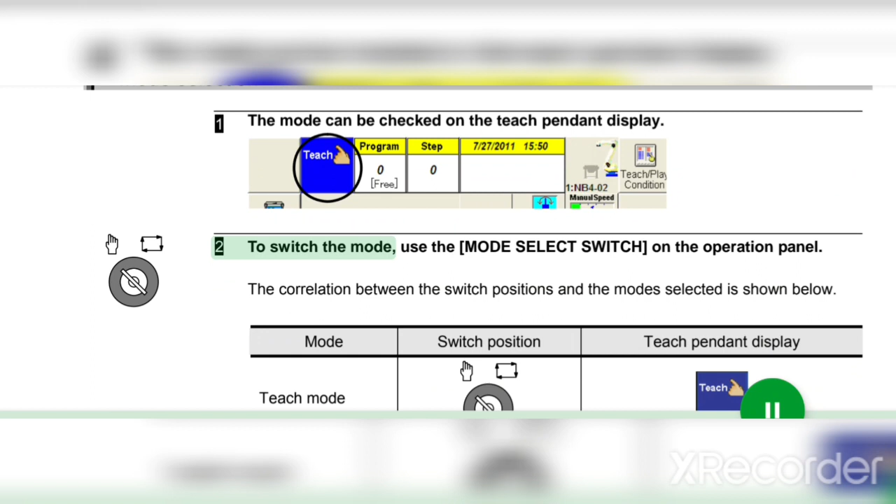3.2.2 When there is an operation panel, the mode is selected using the mode select switch on the operation panel that is installed on the front of the controller. 1. The mode can be checked on the teach pendant display. 2. To switch the mode, use the mode select switch on the operation panel. The correlation between the switch positions and the modes selected is shown below: mode switch position, teach pendant display, teach mode, playback mode. In this status, however, the robot cannot be operated, either manually or automatically. Perform the following operation to initiate operation.

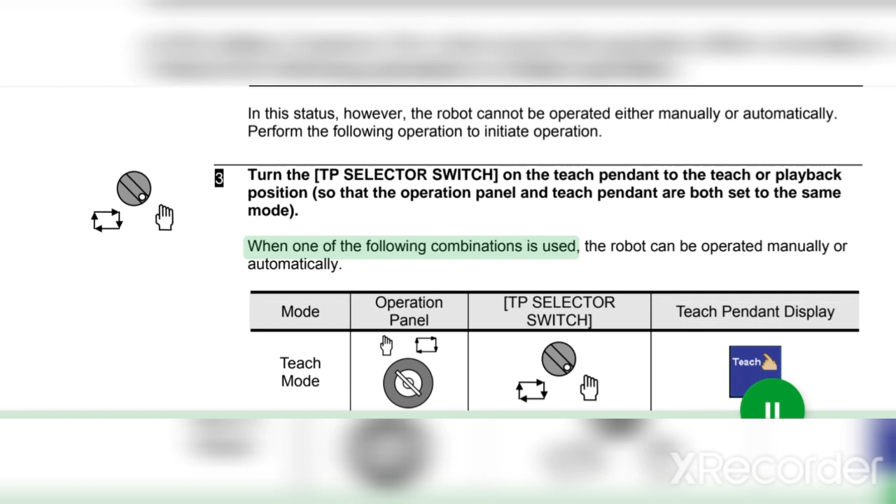3. Turn the TP selector switch on the teach pendant to the teach or playback position so that the operation panel and teach pendant are both set to the same mode. When one of the following combinations is used, the robot can be operated manually or automatically: mode, operation panel, TP selector switch, teach pendant display, teach mode, playback mode. Info. If the operation panel and TP selector switch do not match, one of the following messages is displayed: E0967 teach pendant selector switch is set to manual. A2006 teach pendant selector switch is set to automatic.

The following explanation concerns manual operation or teaching, so establish the manual operation enabled status before proceeding any further. 3.3 Turning the motor power to on. 3-4. To move the robot, turn the motor power to on. If the robot is not going to be moved, the motor power need not be turned to on.

Danger. Before turning the motor power to on, be absolutely sure to check that no one is near the robot. If the robot should move without warning and come into contact or sandwich a person, death or serious injury may result. Turning the motor power to on in the teach mode. Take the following steps to turn the motor power to on in the teach mode. 1. Check that the teach mode has been selected. If the teach mode has not been selected, turn the mode select switch and set it to the teach mode.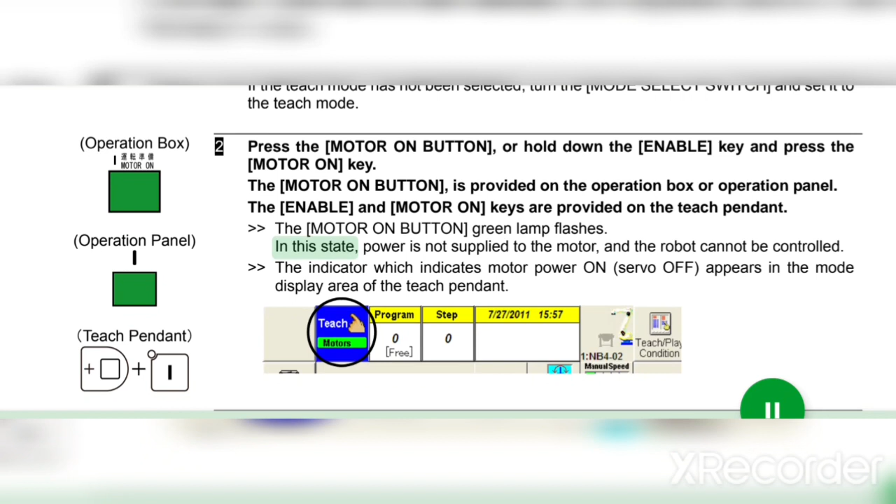Operation box motor on. Operation panel, teach pendant. 2. Press the motor on button, or hold down the enable key and press the motor on key. The motor on button is provided on the operation box or operation panel. The enable and motor on keys are provided on the teach pendant. The motor on button green lamp flashes. In this state, power is not supplied to the motor, and the robot cannot be controlled. The indicator which indicates motor power on, servo off appears in the mode display area of the teach pendant.

3. Grasp the enable switch. The green lamp of the motor on button remains lit. The indicator which indicates motor power on, servo on appears in the mode display area of the teach pendant. While the enable switch is grasped, power is supplied to the motor, and the robot can be moved by pressing the axis operating keys. This completes the preparations for operating the robot.

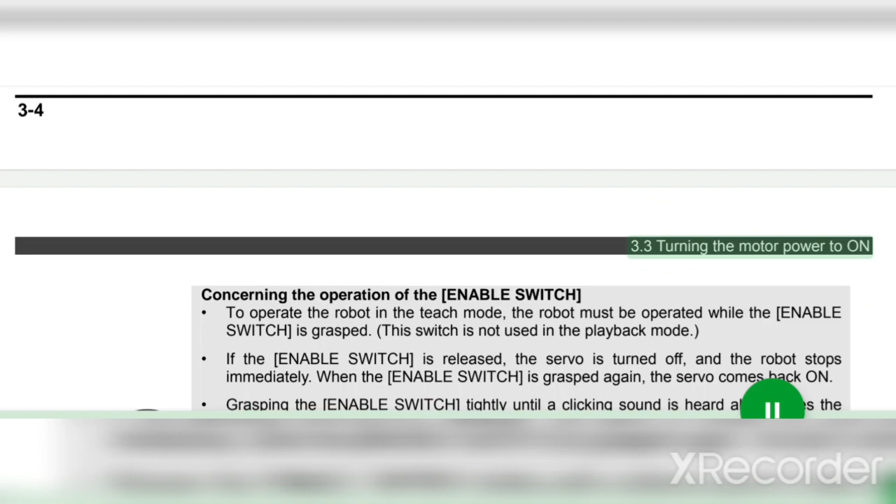3.3 Turning the motor power to on. 3-5. Concerning the operation of the enable switch to operate the robot in the teach mode. The robot must be operated while the enable switch is grasped. This switch is not used in the playback mode. If the enable switch is released, the servo is turned off, and the robot stops immediately. When the enable switch is grasped again, the servo comes back on. Grasping the enable switch tightly until a clicking sound is heard also causes the servo power to be turned off and the robot to stop immediately.

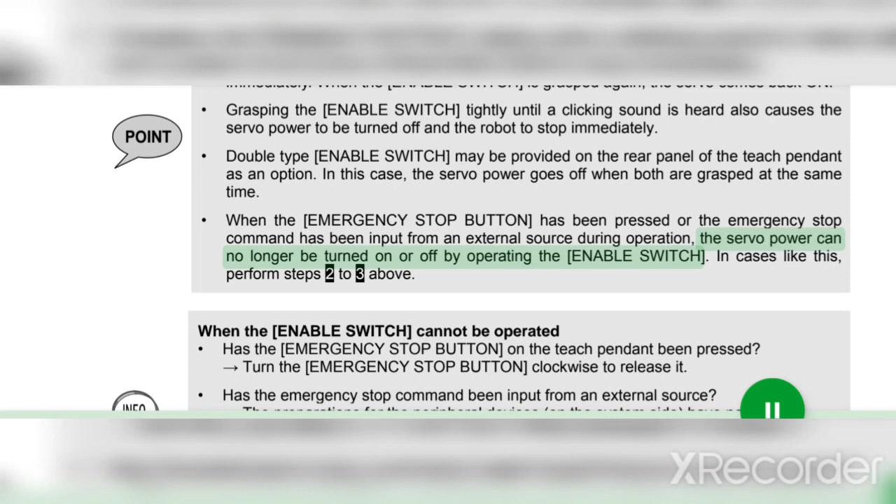A double type enable switch may be provided on the rear panel of the teach pendant as an option. In this case, the servo power goes off when both are grasped at the same time. When the emergency stop button has been pressed or the emergency stop command has been input from an external source during operation, the servo power can no longer be turned on or off by operating the enable switch. In cases like this, perform steps 2 to 3 above.

Point. When the enable switch cannot be operated: has the emergency stop button on the teach pendant been pressed? Turn the emergency stop button clockwise to release it. Has the emergency stop command been input from an external source? The preparations for the peripheral devices on the system side have not been completed. First complete the preparations on the system side, and then release the emergency stop command. Are the TP selector switch on the teach pendant and the mode select switch on the operation panel control box both at the teach position? Set both switches to the teach position.

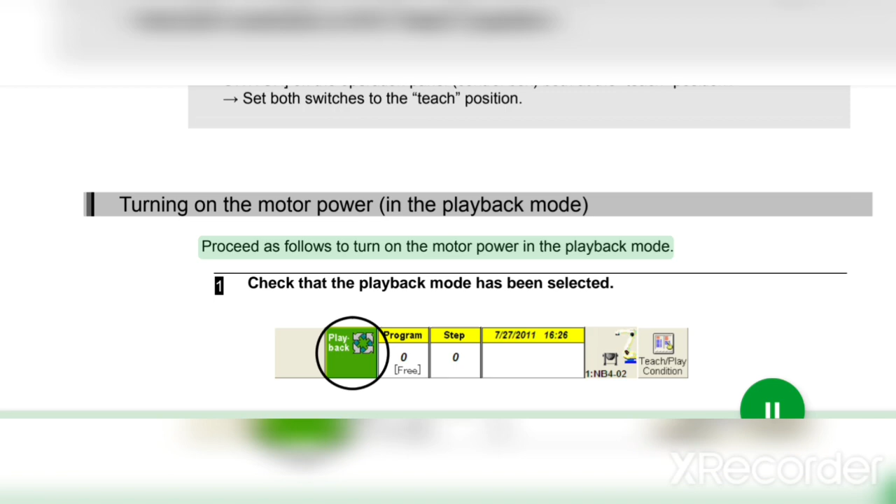Info. Turning on the motor power in the playback mode. Proceed as follows to turn on the motor power in the playback mode. 1. Check that the playback mode has been selected. Operation panel, operation box motor on, teach pendant. 2. Press the motor on button, or hold down the enable key and press the motor on key. The motor power is turned on, and the specified program can be played back at any time. The indicator which indicates motor power on, servo on appears in the mode display area of the teach pendant.

Point. The enable switch need not be operated in playback mode. The motor power is turned on, servo on, when the motor on button is pressed. The enable switch is not used.

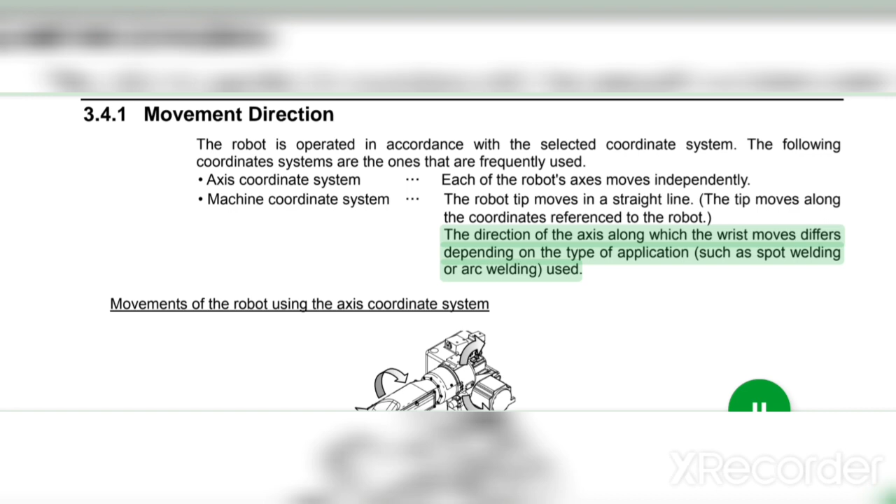3.4 Moving the robot manually. 3-6. Ones that are frequently used. Axis coordinate system: each of the robot's axes moves independently. Machine coordinate system: the robot tip moves in a straight line. The tip moves along the coordinates referenced to the robot. The direction of the axis along which the wrist moves differs depending on the type of application used, such as spot welding or arc welding. Movements of the robot using the axis coordinate system. S plus, X, RX, RX plus. The robot body rotates. The upper arm rotates.

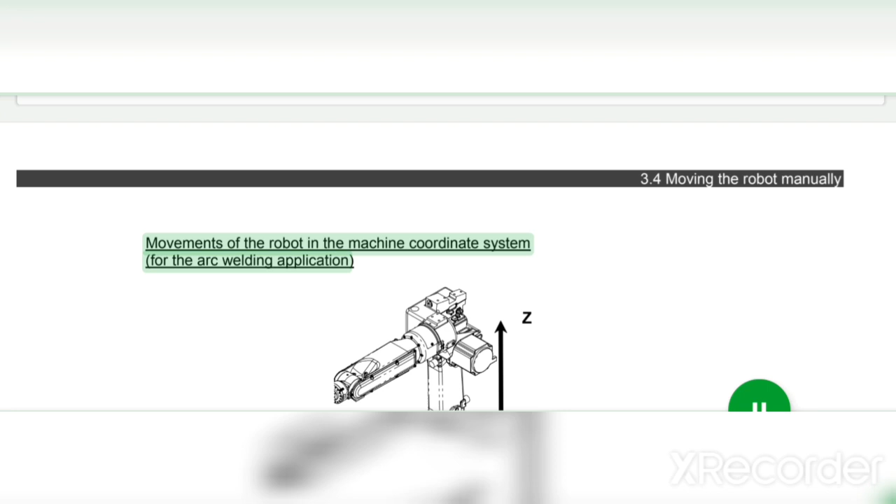3.4 Moving the robot manually. 3 to 7. Movements of the robot in the machine coordinate system for the arc welding application. Z, X, Y, Y, X, S plus, RX plus, RX. The robot moves along the X-axis. The rotation of the 6th axis rotation center line centers on the Z-axis while the tool tip is fixed.

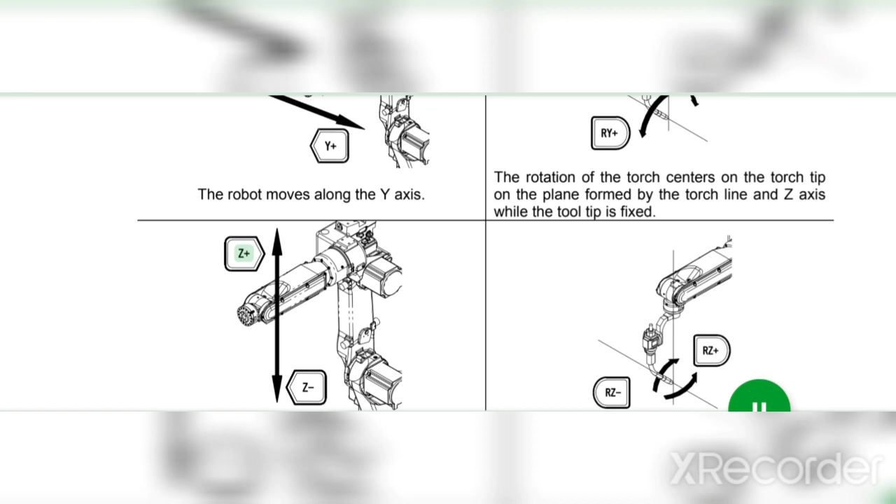I plus, Y, Y plus, Y. The robot moves along the Y-axis. The rotation of the torch centers on the torch tip on the plane formed by the torch line and Z-axis while the tool tip is fixed. Z, S plus, RZ, RZ plus. The robot moves along the Z-axis. The rotation of the torch centers on the torch line while the torch posture remains fixed and the tool tip is fixed. Fig. 3.4.2 Movement directions in the machine coordinate system for the arc welding application.

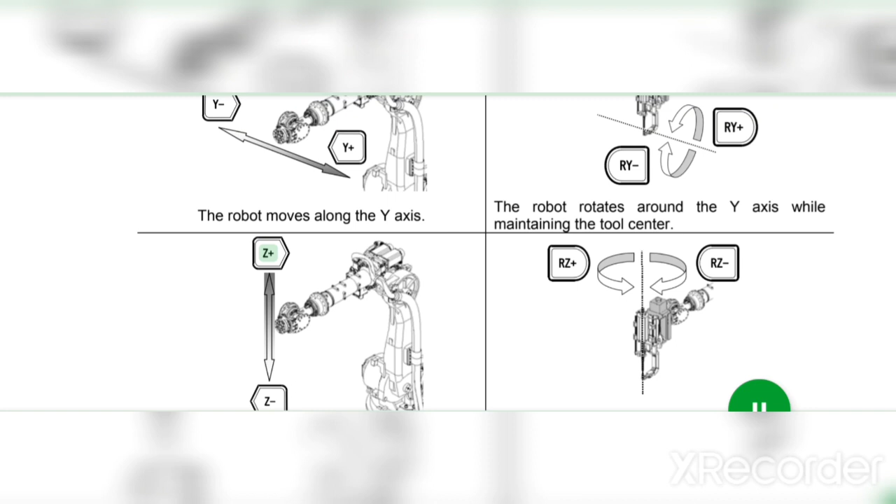Z, Z plus, RZ plus, RZ. The robot moves along the Z-axis. The robot rotates around the Z-axis while maintaining the tool center. Fig. 3.4.3 Movement directions in the machine coordinate system for the spot welding application.

3.4 Moving the robot manually. 3 to 9. 3.4.2 Moving the robot manually. 1. Check that the teach mode has been selected. 2. Press the motor on button, or hold down the enable key and press the motor on key. The preparations for moving the robot are now complete.

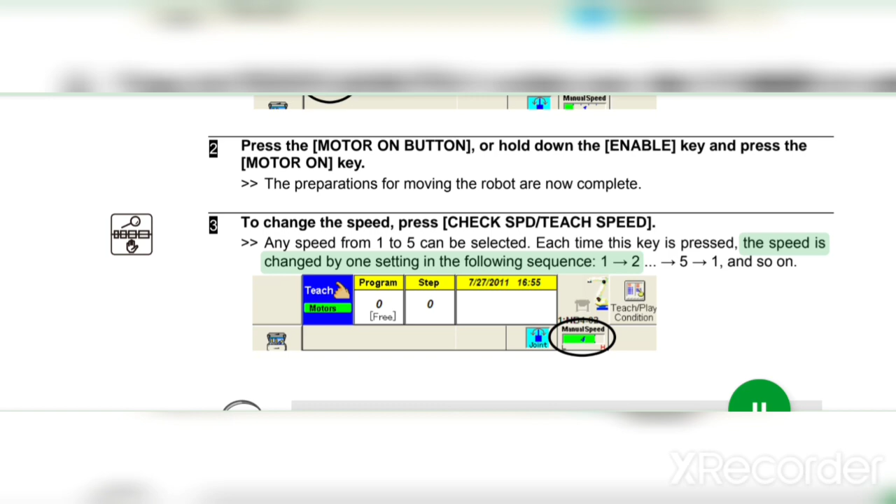3. To change the speed, press check SPD/teach speed. Any speed from 1 to 5 can be selected. Each time this key is pressed, the speed is changed by one setting in the following sequence: 1, 2, ... 5, 1, and so on. Info. The manual speed can be changed by grasping the enable switch and rotating the jog dial while holding down shift.

4. The target mechanism for manual operation appears on the teach pendant. The selected mechanism is displayed in colors. 5. Grasp the enable switch. While this switch is grasped, the motor power is turned on. 6. Press the axis operation keys that correspond to the direction in which the robot is to be moved. The robot is moved in accordance with the selected coordinate system.

3.4 Moving the robot manually. 3 to 10. 3.4.3 Moving the robot with the jog dial. If the manual operation function is allocated to the jog dial, the robot is moved by rotating the jog dial. First, select the operation condition appropriate for the application in the following settings screen. Selecting the operation conditions for jog dial manual operation and operator qualification of expert or above is required. Select the operator qualification before operation.

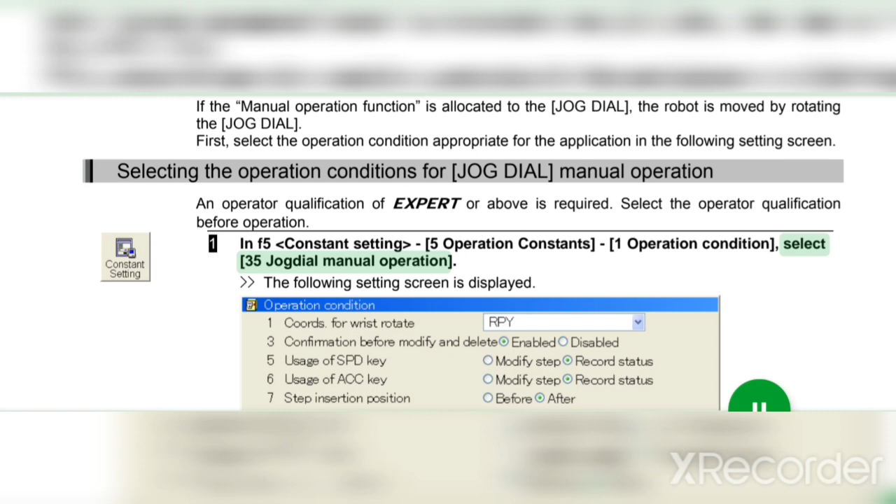1. In F5 constant setting, 5 operation constants, 1 operation condition, select 35 jog dial manual operation. The following setting screen is displayed. 2. Select enable, left/right. Select the operation condition appropriate for the application from the 3 setting items in the following table. Table 3.4.1 Operation conditions for jog dial manual operation.

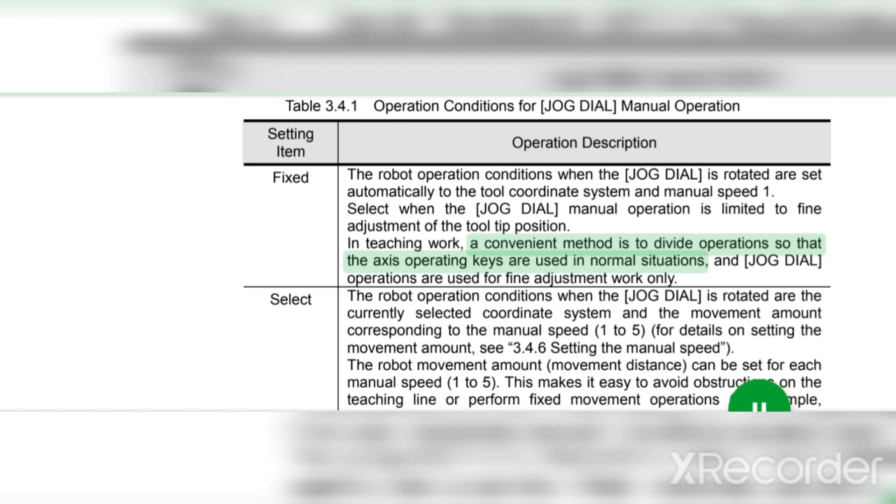Setting item, operation, description. Fixed: the robot operation conditions when the jog dial is rotated are set automatically to the tool coordinate system and manual speed 1. Select when the jog dial manual operation is limited to fine adjustment of the tool tip position. In teaching work, a convenient method is to divide operations so that the axis operating keys are used in normal situations, and jog dial operations are used for fine adjustment work only.

Select: the robot operation conditions when the jog dial is rotated are the currently selected coordinate system and the movement amount corresponding to the manual speed 1 to 5. For details on setting the movement amount, see 3.4.6 Setting the manual speed. The robot movement amount (movement distance) can be set for each manual speed 1 to 5. This makes it easy to avoid obstructions on the teaching line or perform fixed movement operations.

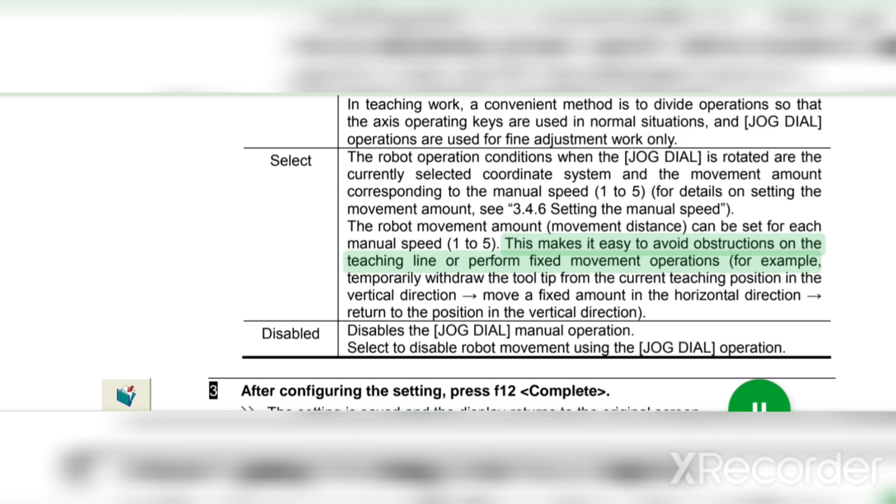For example, temporarily withdraw the tool tip from the current teaching position in the vertical direction, move a fixed amount in the horizontal direction, return to the position in the vertical direction. Disabled: disables the jog dial manual operation. Select to disable robot movement using the jog dial operation. 3. After configuring the setting, press F12 complete. The setting is saved and the display returns to the original screen. Next, allocate